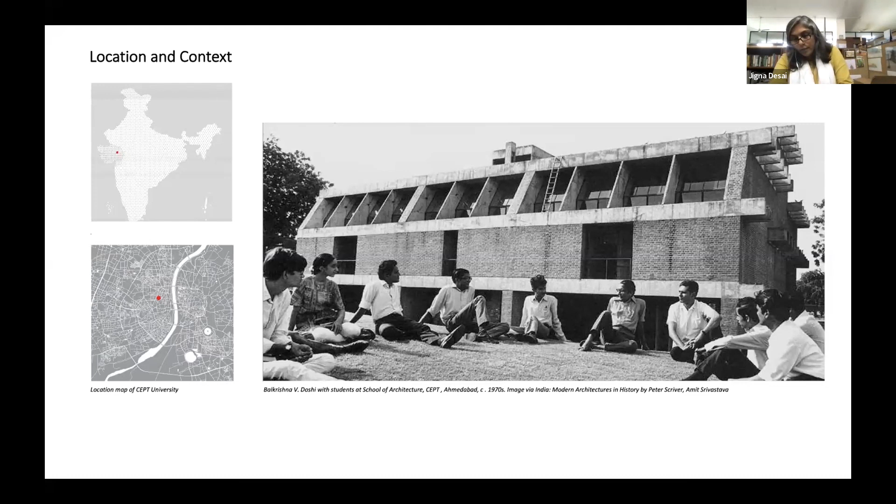In 2016, as I said, when we started discussion on it, we established the need for conservation in the context of the constantly growing campus that had become a university in 2005. You'll see the graphs and studies we did looking at the number of students that kept increasing while the size of our campus did not necessarily increase, even as buildings kept being added—that's a separate discussion, so I won't get into it. But you can see that when the School of Architecture started, the total number of students on campus was close to 100. By the time we did this research in 2017-18, we had more than 2,000 students on campus and more than 300 faculty members. Our books increased, our research changed, the gender ratio changed, and that changes the way we look at values on the campus as well. So these were the contexts we were dealing with.

The process included many people. As I said, we had various discussions with stakeholders, but there were also people at the university who invested their time in understanding the history. Gauri Bharat looked at the different stages of how the campus developed around the School of Architecture, and the core values around which it was being developed. Professor Rutul Joshi looked at the relationship between the city and the university that evolved over the years—when it started, the School of Architecture was practically outside the city of Ahmedabad; now it is within the urban network.

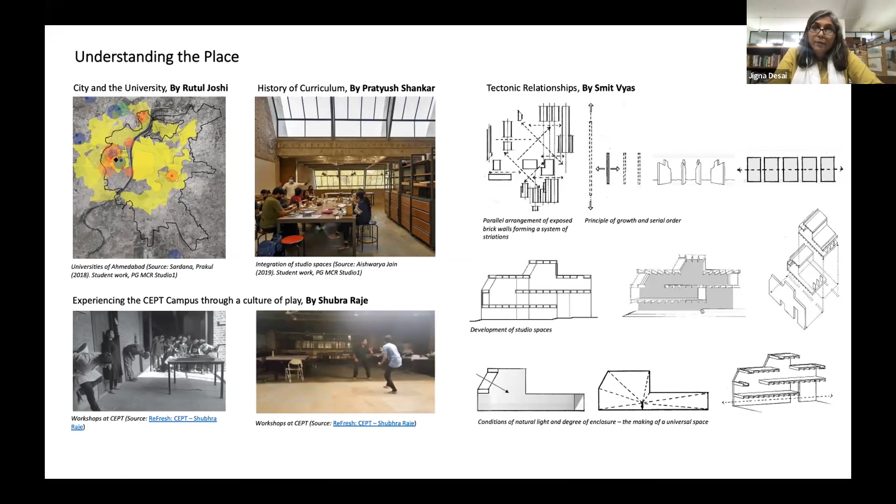Smit Vyas looked at various tectonic relationships that were important, and all of this was at the core of what we did. We looked into recognized discourses that already exist and compared the building to various international practices, and what makes this an important building.

What are the important vistas that are recognized? What are the important elements that are recognized?

The School of Architecture, in more than one way, is a significant structure in the history of architecture. Apart from being noteworthy in the narrative that builds up a Pritzker laureate's work, it also signifies an important phase of modernism as an interpretation of the principles in a context that is environmentally, socially, economically, culturally, and politically very different from the context of its origin. For India, the institution and its architecture represented a new direction of modernity that respects and values its colonial and traditional past, but is unafraid of reinterpreting and rethinking some fundamentals through the lens of democracy.

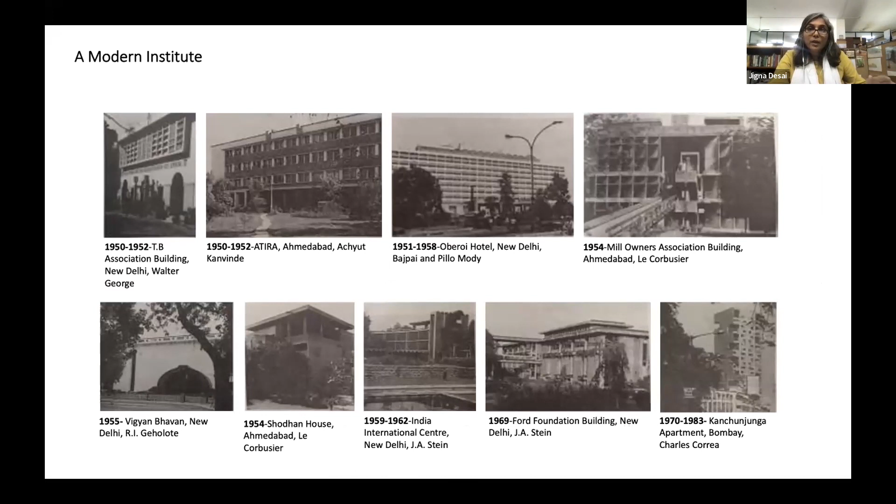We also looked at the building in context of other buildings that were built before, after, and around that period. But we also looked at the lived-in associations and the educational value of the building itself.

Education without doors is the root value of CEPT campus, as conceptualized through the siting and design of the School of Architecture building. Right from the process of construction, the building was and has been a place for learning for architects and students.

CEPT campus and this building has been a constant subject of study with various objectives of education, from study of anthropometrics and learning of drawing skills through sketching and documentation in first year, to architectural and design proposals made in postgraduate studios to interpret the nature of modernity and inhabitation of place.

Apart from the campus being a valuable educational environment, it has significantly contributed to the study of architecture, not only for students of CEPT, but for many schools in the country. Other than the significance of this building, this educational value was the primary platform on which the process of conservation was taken up.

I move to the second part, which is structural repair strategies that Arun has insisted we focus on, and I do this with inputs from Mehul Shah, who's the engineer, Khushi Shah, who's the architect who was in charge of our laboratory at the time, and Nigar Sheikh, who's the conservation engineer, currently also working with us on this.

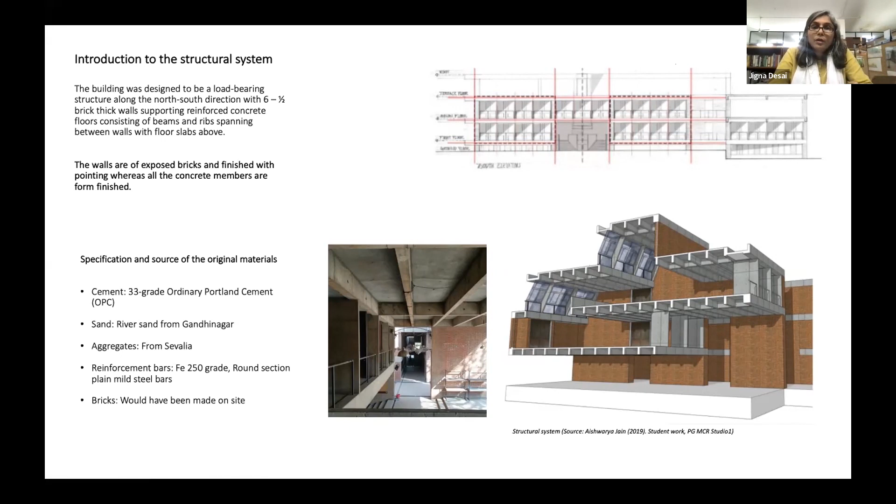And we found that at many places the extended spalling was due to the way repairs through the years, from the 90s to the time we took this up, were done over the period of years.

The condition of the structure when we found it, a lot of this was—as you can see, this drawing is students' drawing. It was initiated as students' exercises and then extended by the teachers and professors as cross-checking and testing processes through rigorous exercises.

We found cracks in reinforced concrete slabs, few beams, fins, and walls. We noticed that in some cases there was complete delamination and spalling of concrete. Doors and windows had not been functioning as intended because of bending in the slabs and beams. There was moisture seepage from the terrace slab, and services like water supply and drainage were a threat to the structure.

You can see the condition of this, and you can see some of the condition of the slabs and the gargoyles over here, where it was in terrible condition. Concrete was in a much worse condition than the brick walls, but because the brick walls were very thick and very strong, only the surfaces were damaged—except for the north and south side, which were not thick load-bearing walls, but were cavity walls.

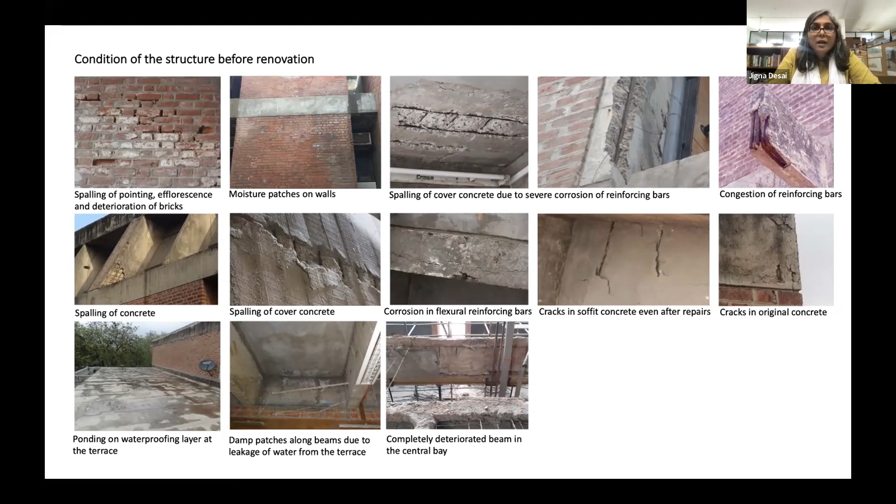Those were situations where the cavity walls had bulged in some places, and we had to relook at it. But the load-bearing walls, other than surface issues, and in a couple of situations where they had cracked, were in okay condition. It was the concrete that we had to worry about.

We conducted many tests, a series of tests that lasted almost 6 months. We took out 9 cores from various places. We found that there was porosity in the concrete that was there, and because of that porosity, there was high water absorption.

We did steel tests - I'll be fumbling with the technological terminologies here because I'm not primarily an engineer, but Nigar, who's here, will be able to explain if there are any questions. We had deflections on floor beams, so there was carbonation in the concrete, and we did brick tests for crushing strength, which were not in such bad condition.

We also then did tests to arrive at compatible repair materials.

For concrete, we did various mix designs. There were trial mixes that we took up. So we took up concrete mix design where trial mixes were tested for their compressive strength after 7 days and 28 days of curing. The color of the cubes was compared with the original.

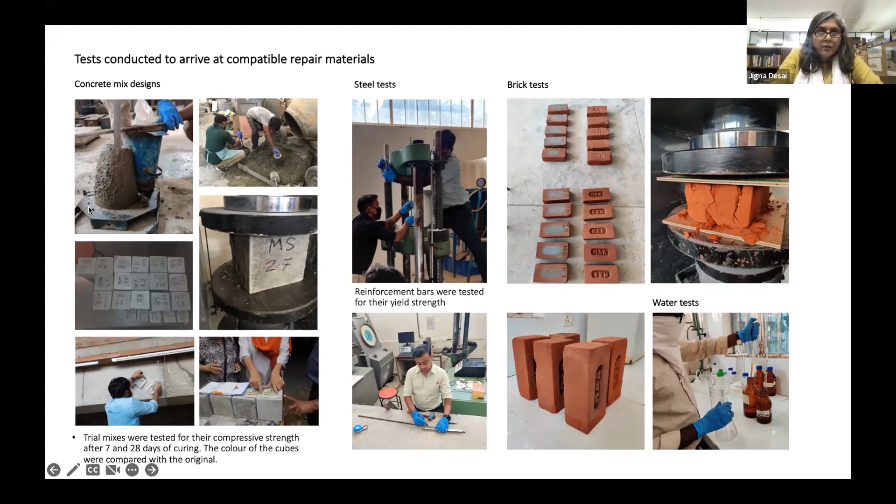And then we started sample slabs and sample repairs for further tests. So we picked up one of the interior slabs that was in very bad condition - just to give you context, the slabs here were 75 mm thick.

There was no concrete cover for the reinforcement in the slab, which meant that at many places the reinforcement was touching the bottom of the slab. Wherever it had started corroding due to that, there was serious falling, to the extent that slabs had fallen off while the spaces below were operational. Fortunately nobody was hurt, but that had led to some of these decisions.

So we did UPV tests, rebound hammer tests, concrete core tests, and carbonation tests, also on the new sample slabs that we made.

Repairs were done based on two conditions we'd identified. One set of conditions was where the slabs were in such terrible condition - mainly slabs and fins - that we had to recast them. But in certain cases, only patches were problematic while the rest of the concrete was fine, so in such cases we did repairs with polymer modified mortar.

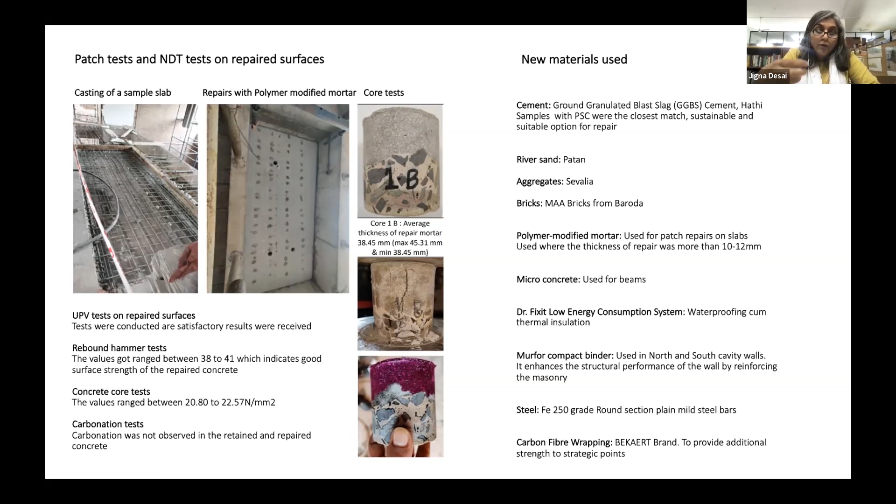As I said, for steel we went ahead with plain mild steel bars because of the behavior difference. In certain cases, at strategic points, we also used carbon fiber wrapping to avoid further complex stresses, especially in the context of earthquakes and future earthquakes we may come across.

So to give a broad idea of structural repairs for brick walls: there were a couple of places where we found deep cracks, and the rest were surface situations. Wherever there were surface situations, after providing support, we removed the outer layer of the brick.

As I said, this is a 6.5 inch thick brick wall, so we could easily remove the outer layer and replace it.

But in certain cases, the cracks were very deep, and in those cases we had removed at least 2 layers till the place where we could see the crack going. We stitched the two parts with SS bars inserted in either side, and then relayered it with new bricks.

The north and south walls, as I said, were cavity walls with reinforcement in the middle, and because of that reinforcement, the walls had bulged. So we had to remove those walls and reconstruct them. While reconstructing, instead of using RCC, which would again, due to seepage or water ingress, result in the walls bulging.

We used polymer — we restored them through polymer modified mortar, as well as fiber reinforcement rather than RCC reinforcement.

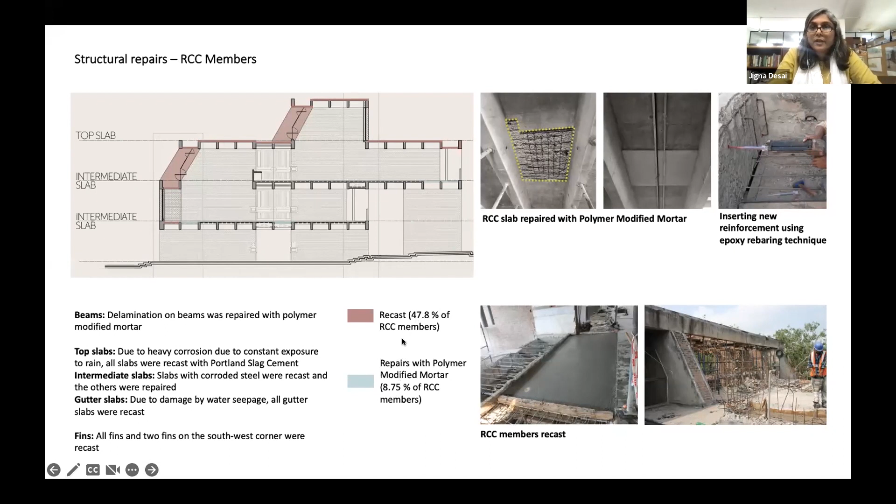Quickly, the RCC repairs — I think this was the most interesting part, where we had to recast 47.8% of RCC members, and repairs with polymer mortar were done on 8.75% of RCC members. I've talked about the process in detail, but this is the layout of members.

There were certain challenges, like bonding between old and new. The thickness of the slab was 75 mm, but when constructing new slabs, the edges of the beams would crack, so in order to address that and have longevity in the top slab, we made the slabs 100 mm instead of 75 mm.

There was the question of pivoted doors at deflected slabs, and how to adjust the 100 mm was an issue. This was a very interesting and long discussion we had while repairing with polymer mortar.

On the south side, we were able to flush it with the older layer, but on the north side, because of the closeness of RCC to the edge, the polymer modified mortar, when repairing the concrete, comes out a little bit. There's a very interesting ideological discussion around the purisms and contingencies of modern architecture that can be had on this.

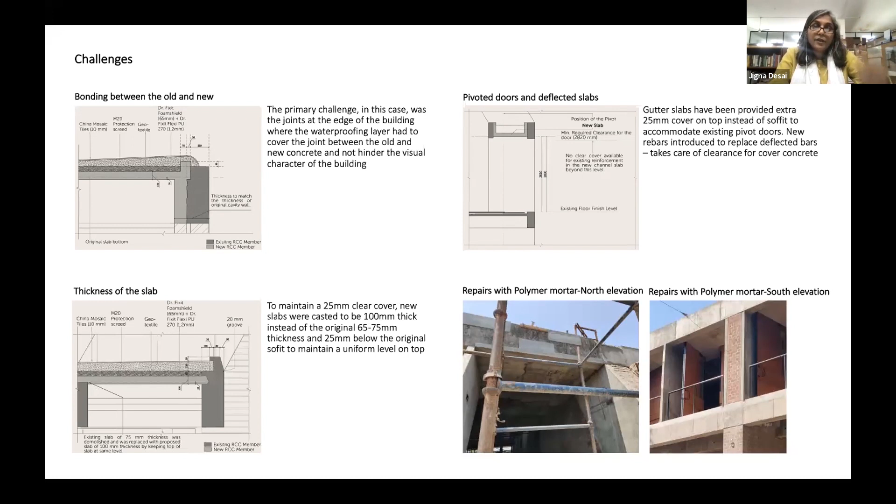Very quickly, on thermal comfort and services — inputs from Rajan Rawal and Mihir Patel, both experts. While recasting the slab, we introduced exhaust ventilators and DGU fixed glass panels.

In order to address the question of comfort and new pedagogies, we introduced certain air-conditioned spaces. We did all of this so that important flows of spaces for this particular section and building were respected, while still achieving comfort.

In the last summer, we noted a difference of 4 to 5 degrees between the parts of the building that are not retrofitted and the parts that are retrofitted — the retrofitted parts are cooler by 4 to 5 degrees.

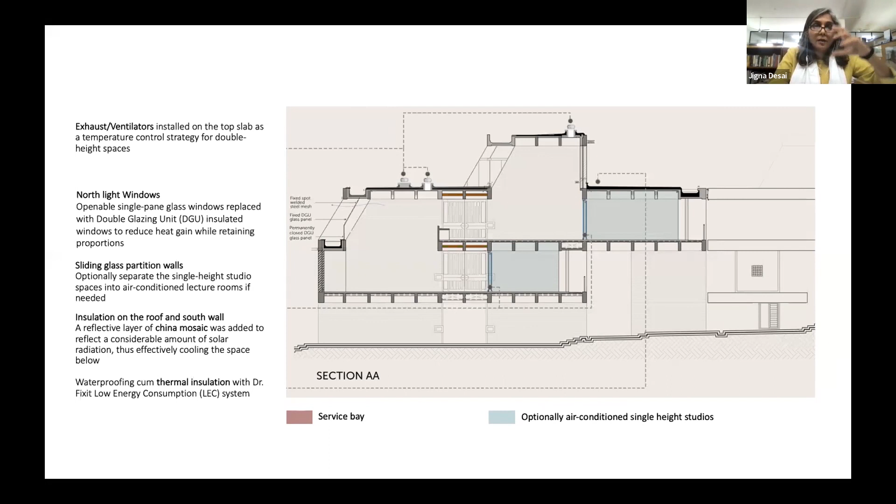We also now have a monitoring and maintenance plan. I won't go into detail, but we have biannual and yearly maintenance during summer breaks that includes checking of concrete elements and brick walls.

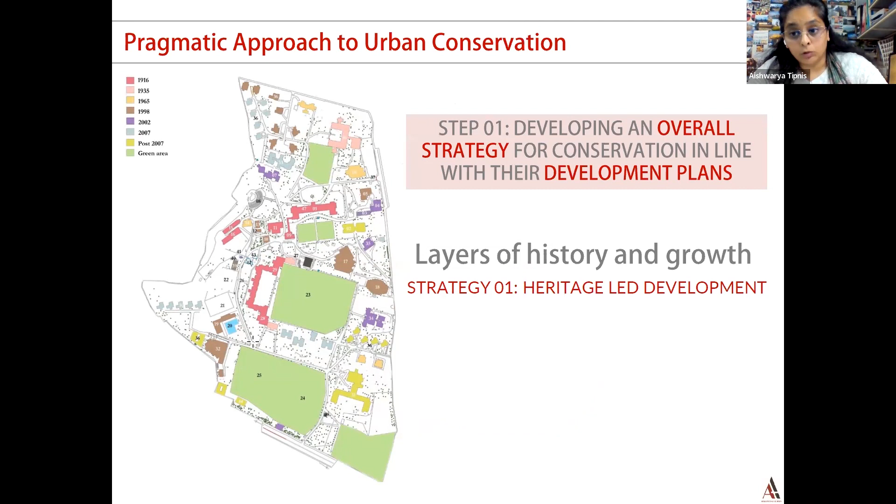So the first question we had to answer was how do we define this heritage, and how do we define the values of this particular heritage?

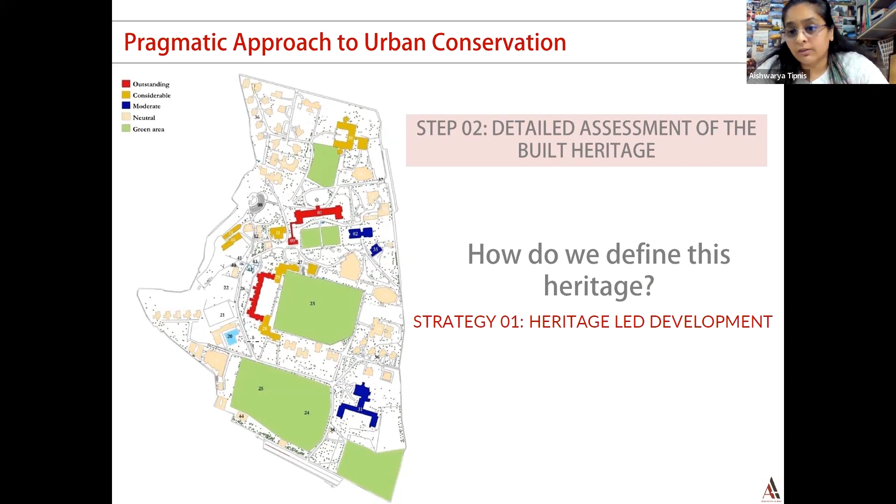In 2014, when we started this project, we decided to take a bottom-up approach where we engaged with the community through various workshops, not just with the students, but the staff and also the alumni.

This was to come up with an understanding of what really mattered and what this heritage was that we had to preserve while taking the building into the 21st century. The key observation from this series of consultations was that this had to be an institution of excellence.

It had to be a center for learning, and the needs of teaching and learning therefore became central to deciding what we were going to do with this building.

What also came out was that the main building was a key part of the collective identity of every generation of DOSCOs that went through this school. It was often the backdrop for all the group photographs, and so the heritage value actually lay in the collective memory of the community.

I'd also like to add that this building is an unlisted heritage building, and the idea to conserve it was largely for the love of the community towards its heritage.

We got involved in the project in 2014 because the community felt there were some structural issues that came to light. There were issues with cracks they were seeing everywhere, and they were really worried.

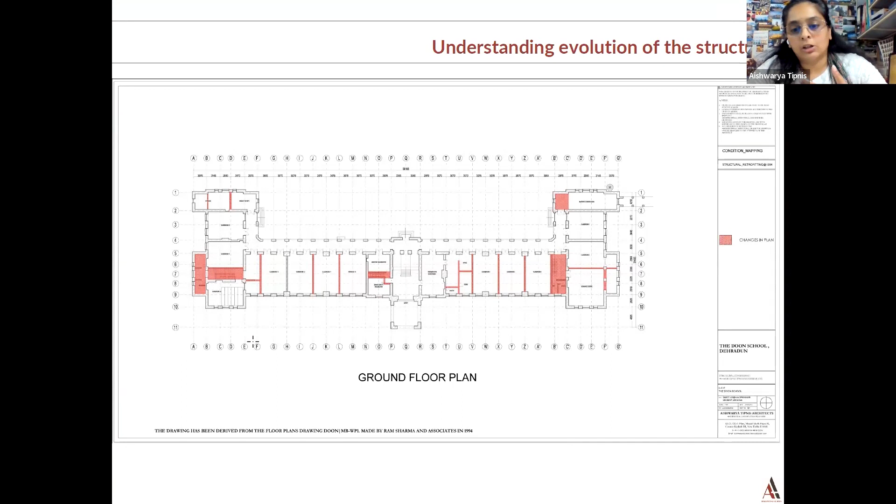There were places where they added partitions and new staircases, all done with the idea of seismically retrofitting the building for future earthquakes.

When we started doing the analysis, we realized that the actual cause of some of the structural issues we were facing were these interventions that had happened in 1993.

We did a first visual analysis of what we thought were the issues, and as you can see on the screen, there were several stepped cracks almost everywhere. Wherever these RCC lintels had been inserted, there were certainly cracks on those sections of the wall.

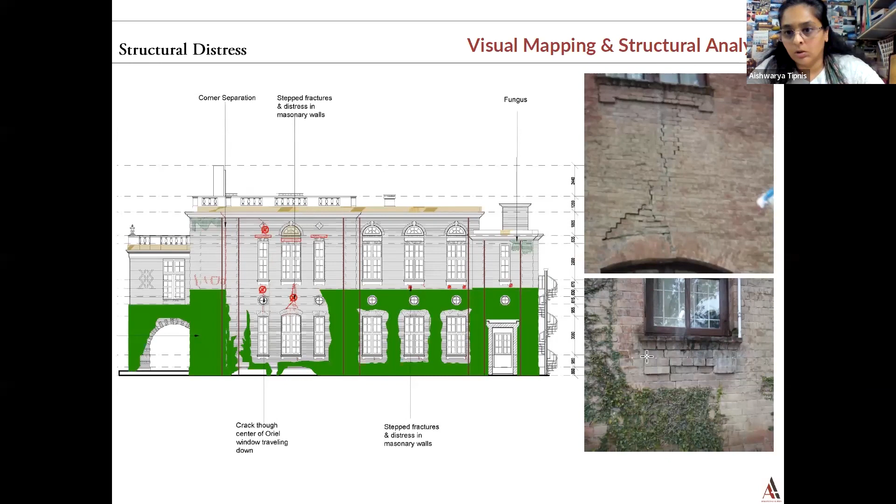The other critical issue was that the main facade of the building on the ground floor had this ivy, which was again a critical element of their collective identity.

The school has always had an ivy, and that was one of the main concerns that came out through the consultation with the community, that they needed the ivy.

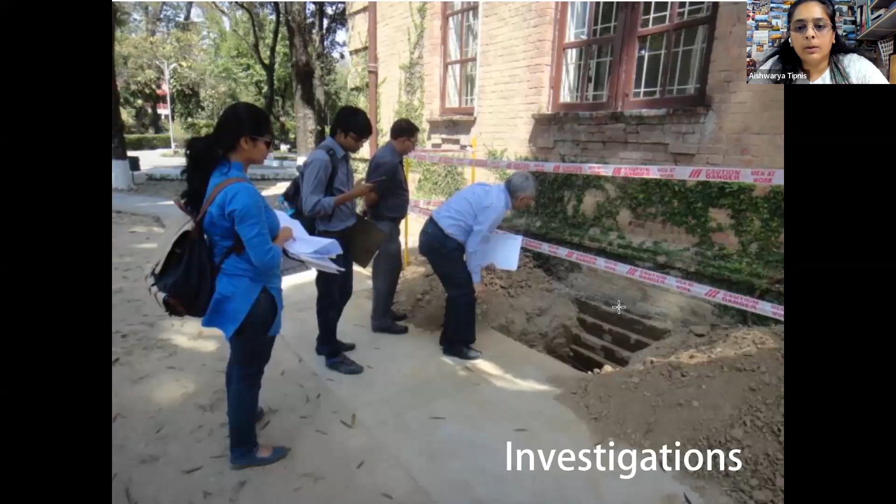However, the ivy was trapping a lot of moisture, and all the rooms on the ground floor had severe signs of seepage, and all the bricks were showing signs of efflorescence. So while the ivy was very important to them, it was causing quite a lot of harm to the material fabric of the building. It was a very challenging thing to sort out, because this was non-negotiable, but we had to find a technical solution to sort the material issues while keeping their collective identity intact.

So we started first with some very basic investigations as advised by our structural consultant. When we saw all those cracks, the first thing we did was investigate all the foundations, and it was a relief to find that the foundations had no issues as such. We looked at the terrace and realized there had been layers of materials put for waterproofing. We did find the original brick bat coba, but we also found layers of waterproofing put on top of that.

When we looked inside, we realized there was this stepped auditorium which seemed pretty old, and everyone from the community told us it was always there. But this was the section of the building where we found maximum vulnerability, on the exterior as well as the interior, and part of the foundations here had cracks going all the way down.

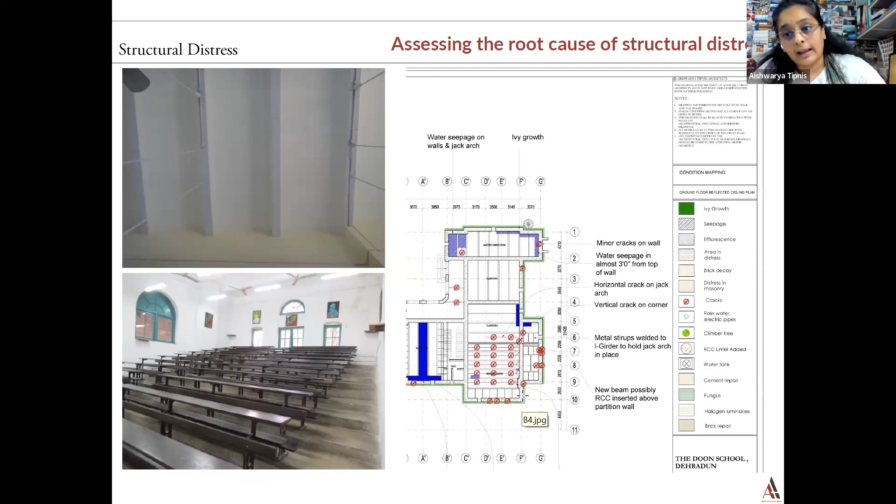The other significant problem was that over the years, all the levels around the building had gone up, and the building had sort of become like a saucer. Dehradun receives very heavy rainfall, and as a result, water was always collected at the base. While they had created some drains, some of these actually led nowhere and led to more water at the edge of the building, causing the severe seepage issues we saw.

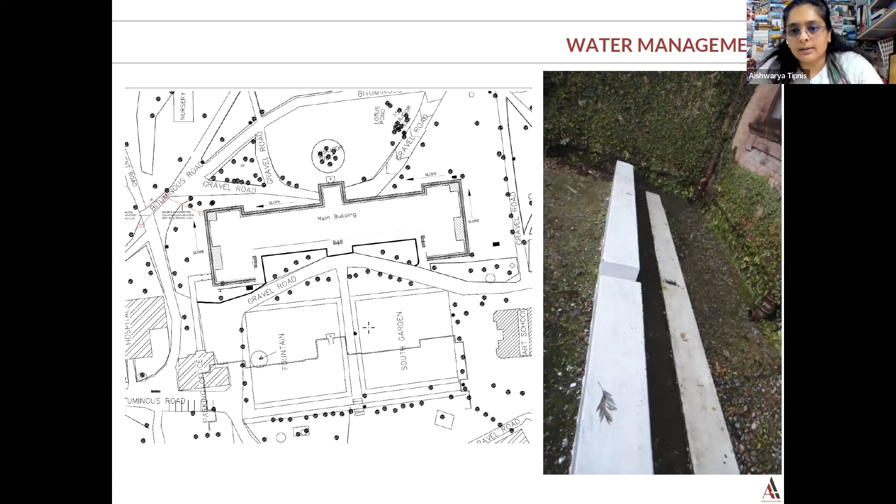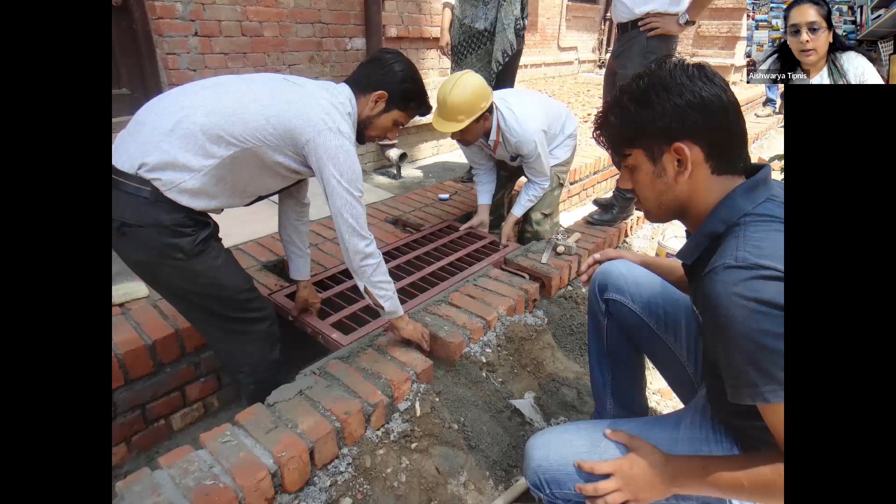So some of the things we did was sample methods of treatment, to get rid of the moss and understand what to do with these drains. We worked out an entire system of water management, putting in damp protection as well as a complete drainage system to take surface rainwater away from the building, in the hope that it would help with water seepage and ingress from the floor. The entire work was done by the estates department of the school along with local masons and contractors, and it was completely executed locally.

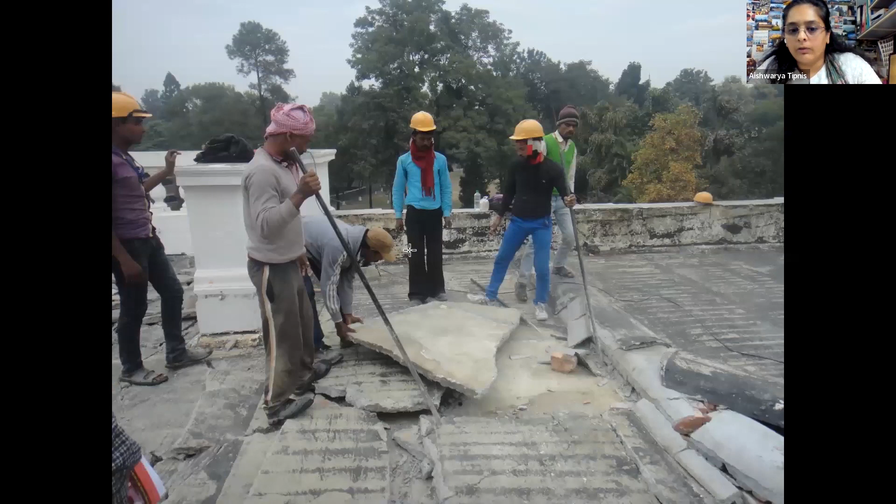The second issue, as I mentioned, was the terrace. The terrace had these layers of waterproofing, and when we started the work, we were able to get back to the original level of the slab, then put in a new layer of waterproofing like a membrane, finish it off with brick tiles, and make sure all our water outlets were clear so rainwater could disperse properly.

Now, it seems like a very obvious thing to do, but having done this, I think the major problems they were facing with water seepage from the roof as well as around the building were completely sorted, and we have not heard any complaints even 7 years after the job was completed.

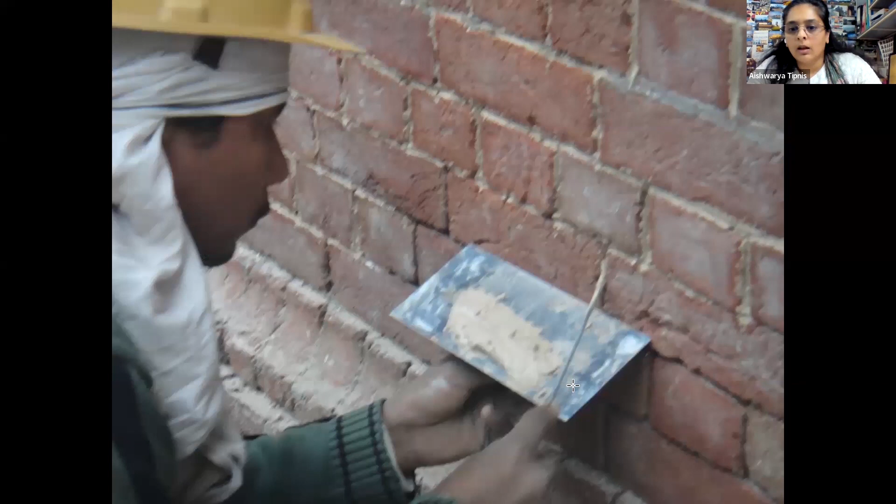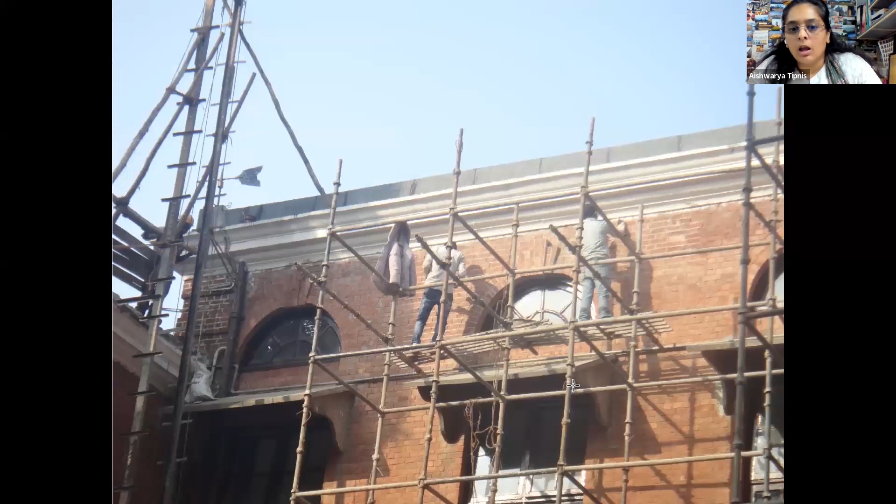The other thing was, once we removed the ivy, we realized that most of the pointing had been completely destroyed. So the local masons completely re-pointed the entire building in lime mortar. This was new for them, because as an estate and as a team of local contractors, they were not very conversant in using traditional materials.

However, they had never done something that needed to be reversed, like putting in cement. So we were lucky that it wasn't something that had damaged the building beyond reversal. Once the pointing was done, in sections where RCC lintels had been introduced, we couldn't remove them, so we decided to let those beams be but add additional reinforcement. Helifix stainless steel bars were chosen as a system, introduced into the cavity in the pointing, and since they were stainless steel and compatible with the lime mortar, that was one of the main reasons we chose them.

So they were used on some sections of the facade where we had cracking of the arches, and in some sections where we literally just bypassed the RCC lintels and fixed it. This was on the advice of the structural engineer on the project.

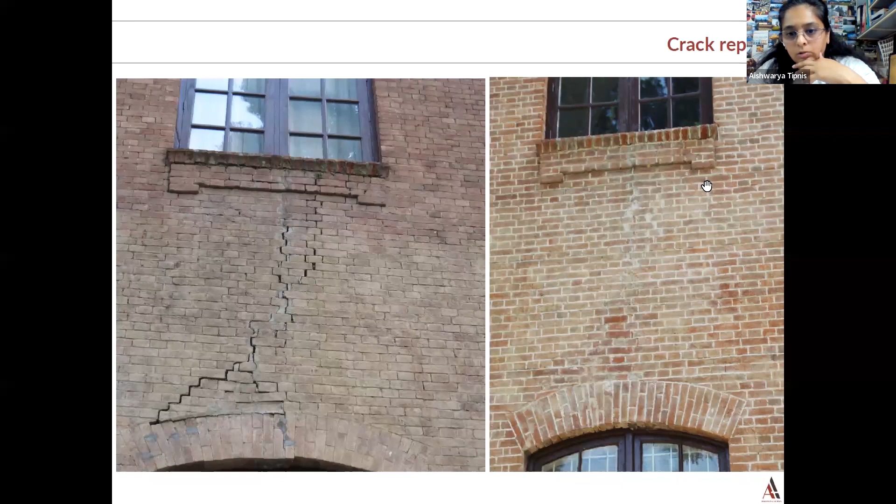These are some pictures showing what had happened, where the arch had slipped. This was all taken down and rebuilt, and we've had the Helifix bars inserted at two or three sections in this particular elevation. I'd like to draw your attention to this particular facade, as you can see this had been bricked up and these windows had been made small. This is really what we found out was the actual reason for most of this distress.

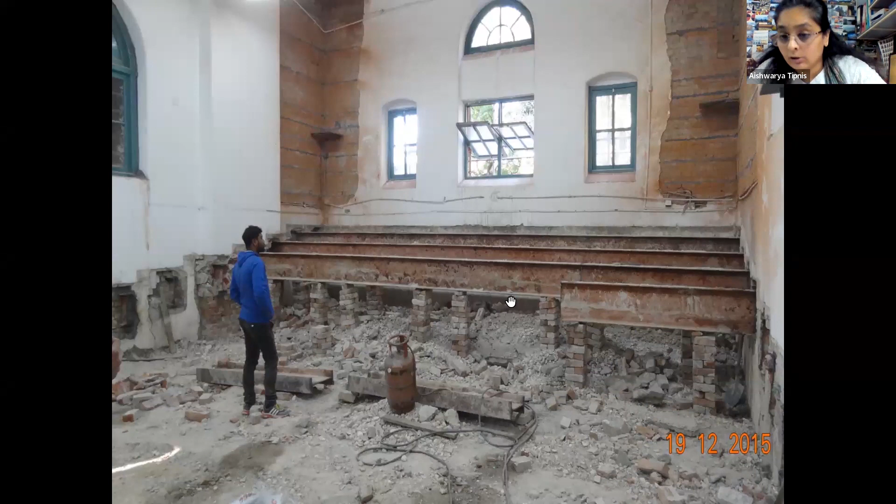This stepped auditorium was added in the 1950s. When this extra loading from this building was carefully taken down and the entire space reimagined as a new collaborative working space, we were able to address the main reason why this extra stress was coming in, with all of these I-beams that were added in the 1950s.

As far as the other spaces in the building were concerned, we looked at adding new services that helped 21st century teaching, which required overhauling the electrical and lighting as well as acoustics. We were very careful that while we wanted to add color and a new element, the aesthetic of and the feeling of being at Doon had to be retained. So it was a very critical balance for us to convince the community that bringing in a new thing was actually not a bad idea.

Seven years down the line, I think it has now become part of the collective identity of the current generation of students in the building. This is just a photograph to show that now these buildings are used and loved, and it's very much a part of their identity. We received a UNESCO award in 2016, and this is how the building looks today.

I think the whole point of this project was really to say that if there is love for a building and there is the right advice, a lot of things can happen. There was no mandate from law. There was nothing protecting this building other than the love of the community for its own heritage. So I'll stop there. Thank you.

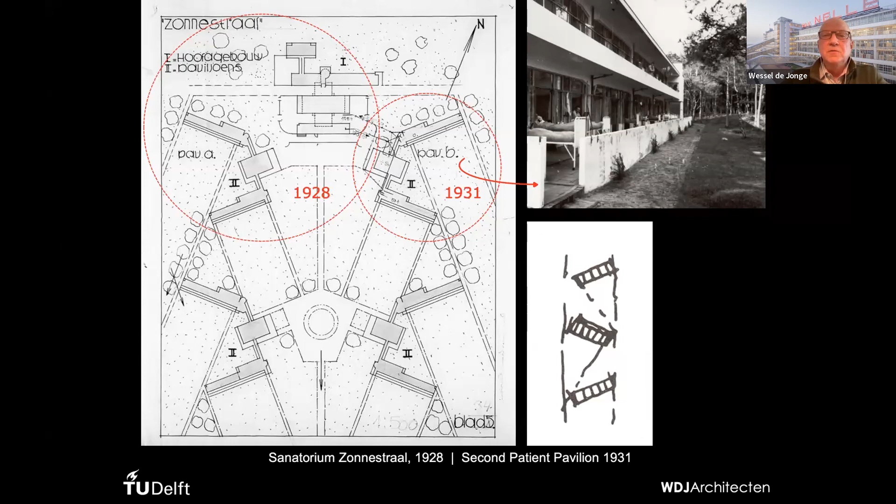Here you see the layout as it was built. The third and fourth pavilions were never constructed. As you see, the second pavilion in the back is already there, so this picture was after 1931.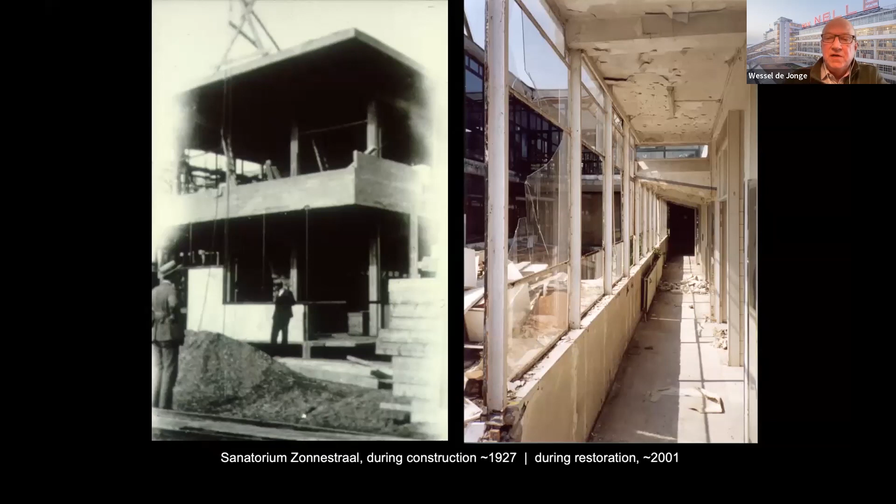This is exactly how the sanatorium buildings of 1928 were built after the load-bearing concrete frame was in place. You may see on the left picture, it's not a very good picture, but it's the only one we have, found in an archive. You may see the gentleman positioned in front of the spandrel, and to the left and right of him, vertical I-beams, INP 8. On the right picture, during restoration, you may also recognize those I-beams, and the spandrel beneath is made of this double-sided plastered metal mesh, a very light construction.

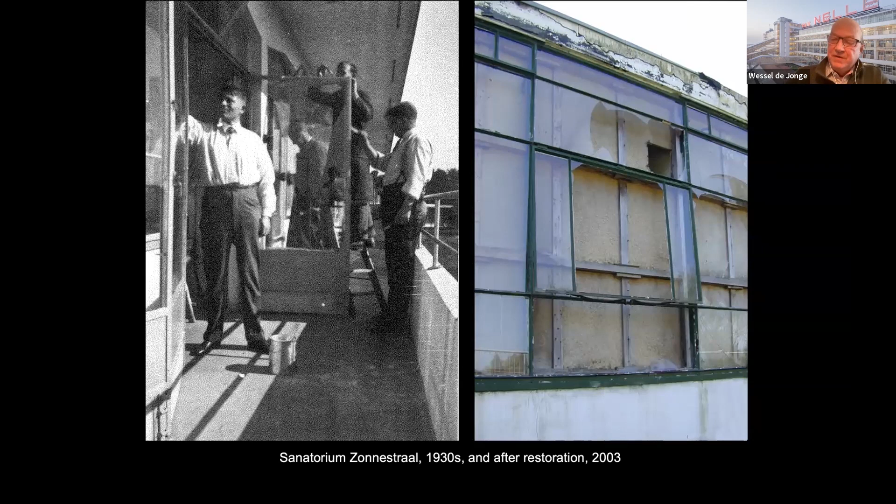As I said, the materials were not necessarily very durable, and that was also the case with the metal framed windows. Galvanized windows were already available in those years, but they were not used because the architect expected the building to be used only for 30 years, so that was not a good investment in their view. As a matter of fact, the patients who were curing, most of the people were not sick, it was an aftercare colony. So most of the people were already largely cured from tuberculosis, but they needed aftercare, and all kinds of activities took place on the premises, one of them being painting the steelwork. So there was not really a need to make the steel framed windows very durable, given that the patients would care for their maintenance regularly.

A particularity about the facade was that the architects opted to save more money by making the first window of 1.5 meters a complete casement, and then the next casements would lack a jamb, welded against the first one, with the effect that they shared a jamb in the middle, as I indicated on the lower picture. That little T profile is actually part of the window to the left as well as part of the window to the right. So there was no measure tolerance in the facade at all, which produced all kinds of problems later during construction, because the building is 33 meters long in total, with over 20 of such windows. You can easily imagine that if there's 0.5 millimeter of incorrectness in the measures, you end up with a few centimeters short in the end.

So they experienced, it was a kind of experimental curtain wall system with all kinds of mistakes that were still apparent and became problematic in the restoration later on.

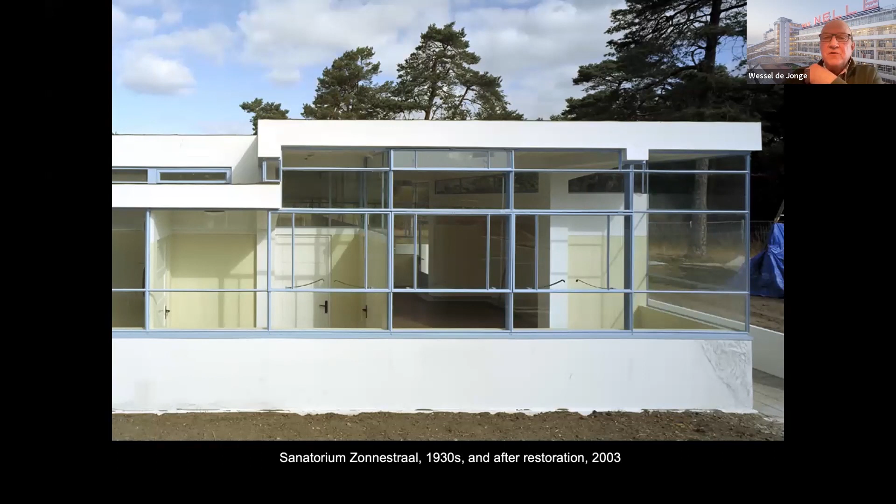The material defects, damage and loss was the concrete frame. There was a lack of resistance to shear forces, reinforcement corrosion and cracks. Of the steel framed windows, 90% had been lost, so the one you just saw was the 10% remaining. The roofing was worn out, the building service systems had almost gone lost, and the interior finishes had gone lost as well.

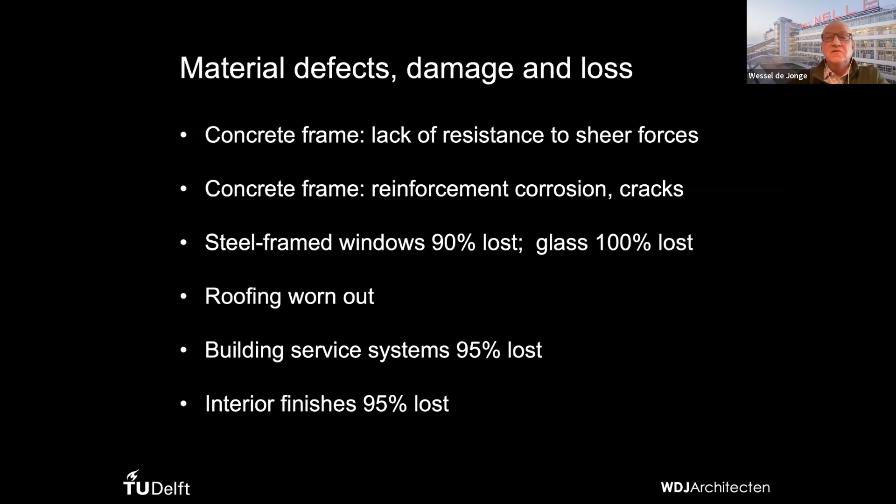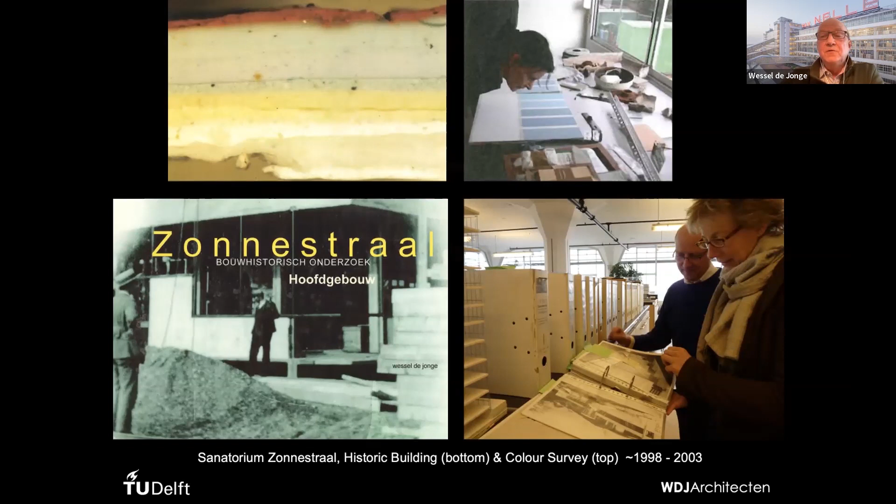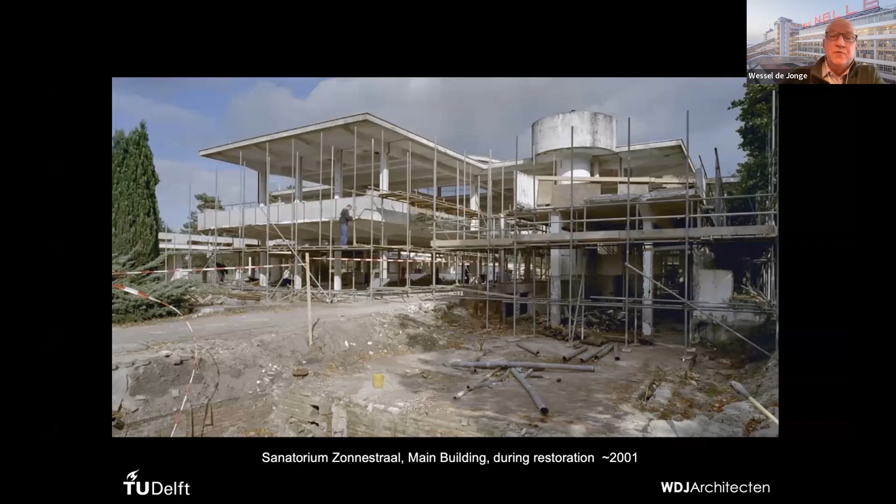All the partitions that were in the building were not original, and had been taken out. The 1970s facades had been taken out, and so on and so forth. Only that one remaining part of the building was restored.

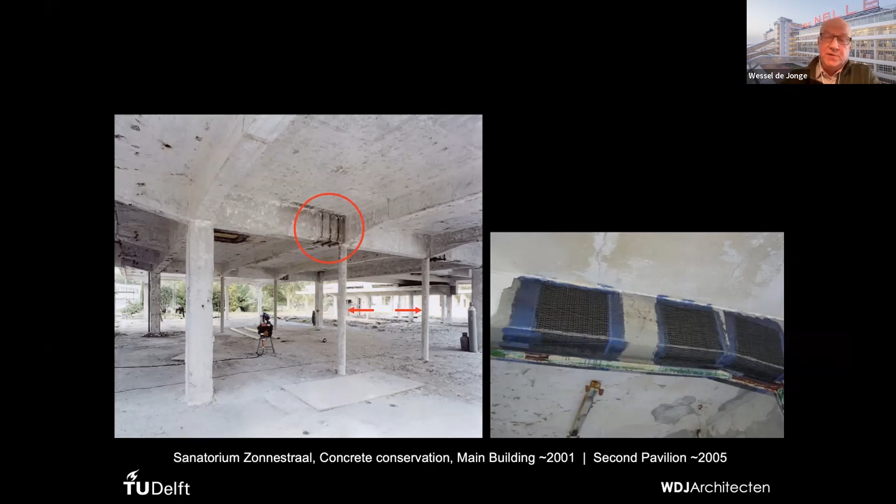Here you see a carbon wrap reinforcement, as already indicated by one of the speakers before, Bekar. This made me think also of the brickwork of the IMA building. We were talking about stainless steel, which is very expensive to reinforce the brickwork. I was also thinking about using ordinary steel welded into an electric circuit so that cathodic protection may work. Carbon reinforcement is also possible. In the Netherlands, we also use plastics as reinforcement, as well as gluing the bricks together. That may also be tested for the IMA.

Now the main issue, I see I have to really speed up. The main question has been about the glazing.

In the reconstructed facades, instead of the original 25mm profiles, we decided to choose 32mm, in which we could place double glass of just 11mm thick, made specifically for the project, with a drawn glass outer panel to mimic the original character of the drawn glass. This allowed us to make insulation.

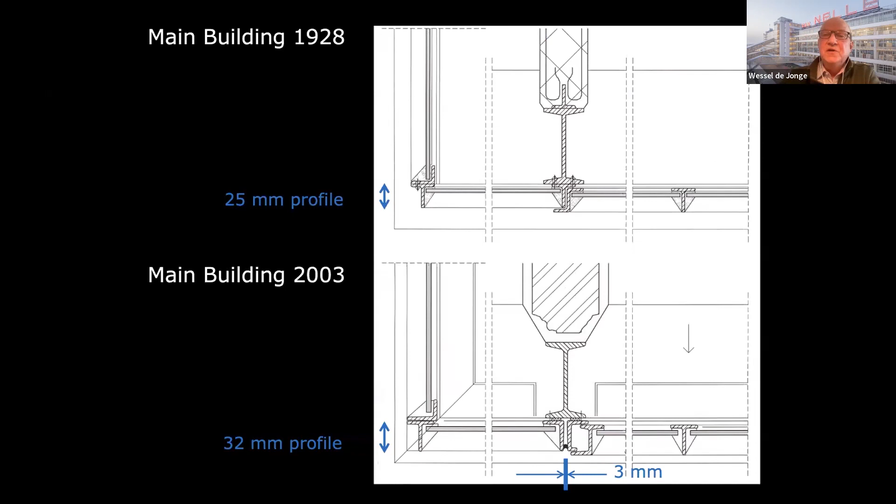The other change we made, as you see on the bottom image, was the shared T profile of two windows, which we replaced with a double L, allowing 3mm of measure tolerance, which made the reconstruction possible. To the right, you see that detail filled by putty, so you can easily distinguish the reconstructed details from the original details to the left.

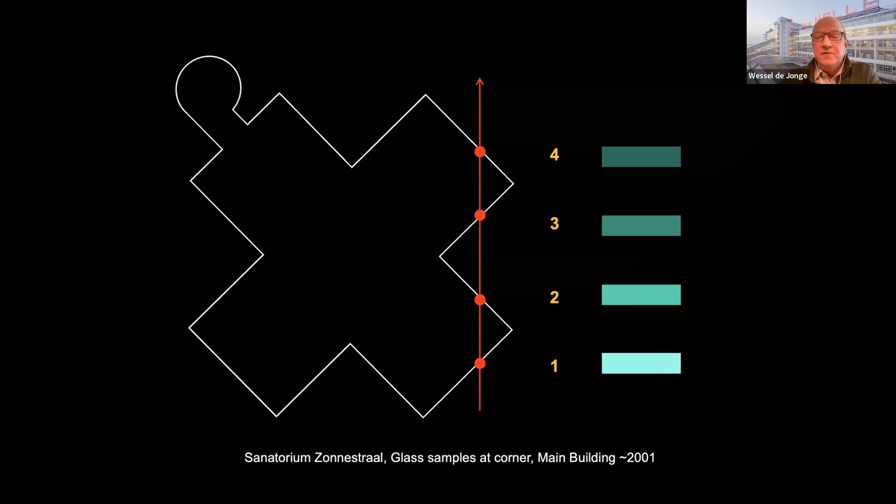Here you see the building during sample testing. The corner of glass was tested extensively. As I said, it was drawn glass, but present-day glass is slightly green, and the upper floor, due to its cross shape, would allow you to look through 4 layers of glass. So the greenish tone was really an issue, as well as the rippled surface of the glazing that we had mimicked.

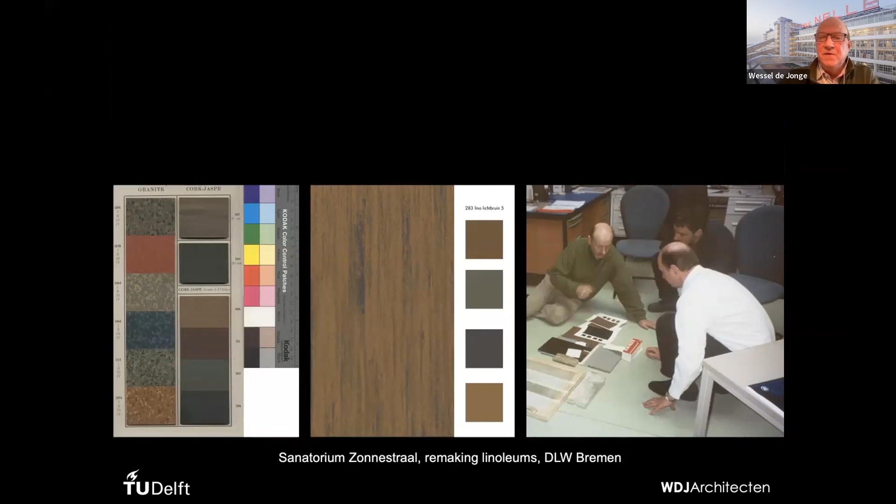The linoleum that was originally there was no longer being produced. You see the original samples from 1928 to the left. We digitized the samples and tried to analyze the types of pigments that were used, as you see in the middle. To the right, you see us in the laboratories of DLW Bremen, one of the big linoleum manufacturers in Europe, where we were able to remake the linoleum.

With the last few slides: what you have seen is that the restoration involved a high degree of reconstruction, but because it was based on extensive research that took several years, we were sure that it had a high degree of truthfulness. All the reconstructions we did were based on factual findings of the research, so we didn't take chances of making mistakes or interpretations. We kept original materials and constructions wherever possible, but as you've seen with the window details, we accepted a degree of interpretation elsewhere.

Also, the complex—maybe useful for the IMA case too—had some repetition. We had 3 buildings, so we decided on various strategies for each. That allowed us to be a little more pragmatic in some instances, because we knew in another building, or another area of the same building, you could see the original details and how it originally was.

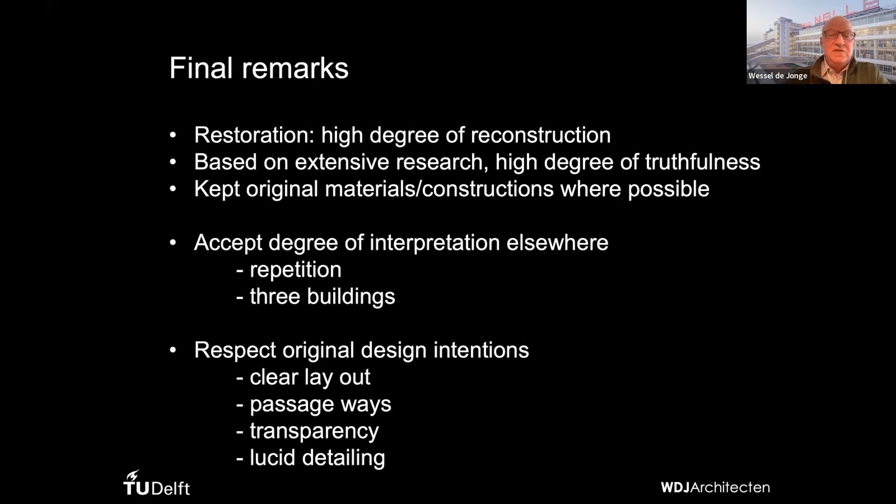Thank you very much, a very interesting case study. Shall we now move on? Arun, I can try and share Ciro's presentation. Just give me a second. Yes, please, thank you.

Eladio Dieste studied Calculo and Mechanical Engineering in Montevideo. After graduation in 1947, he formed a company dedicated to micropiling and began to provide structural advice to local architects.

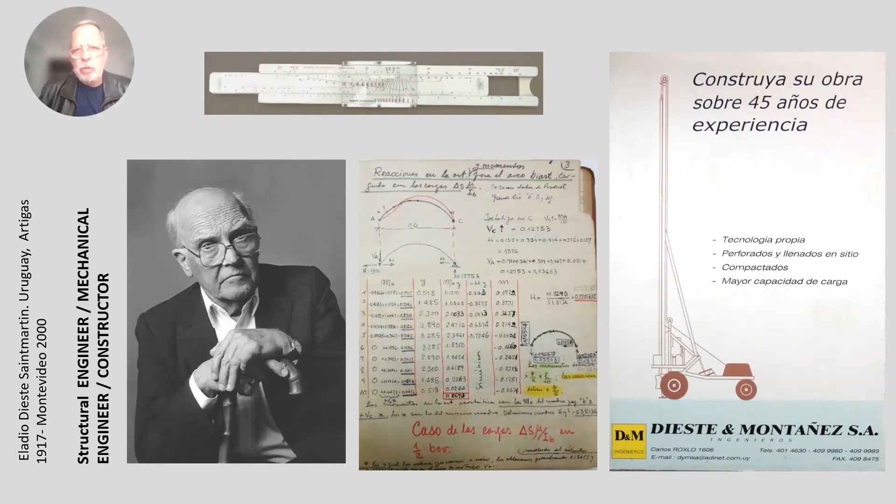In 1955, he formed with Eugenio Montañez a construction enterprise with workers, professional machinery and equipment, oriented to the construction of industrial buildings. He specialized in construction of multiple curvature vaults in reinforced brick with mobile formworks and sectional handling of natural light, which, due to their economy, earned him recognition and numerous public and private bids throughout the country.

We present the four basic structural typologies used in Dieste's works. The upper left image corresponds to a double curvature or gause vault. The surface is formed with a grid built with bricks and metal wires, supported on reinforced concrete beams and column structures. They are complemented by steel turnbuckles inside. In this system, free spans of 50 meters between supports were achieved.

On the right, we see a self-supporting vault, a catenary placed linearly with a V-shaped form in the joints, which house the steel reinforcements and tensors embedded in concrete. With this system, roofs with free spans of 24 meters and overhangs of 13 meters were achieved. These two typologies have an average roof thickness of 18 centimeters.

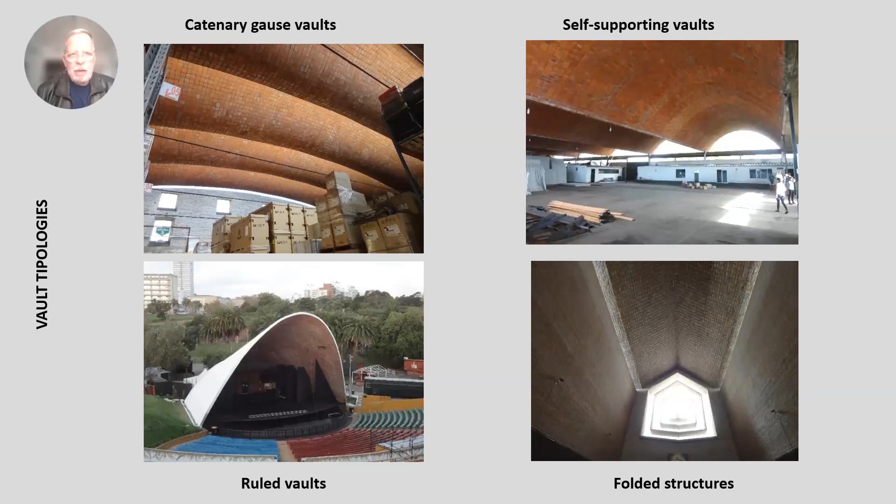In the lower part, we see examples of less used typologies, also in reinforced brick, mainly due to the high cost of the formwork and longer construction time, such as ruled surfaces and folded structures.

Knowledge of the materials and their characteristics is essential to understand the particularities of the design and to guide the conservation of the buildings. In this case, the same materials were always used: handmade bricks for houses, schools, and buildings that do not require large spans, with lime and cement mortars.

Industrial brick for vaults with steel wires in the joints. Flat clay tile for the final covering of the vaults. Industrial waterproofing materials for the roof. Reinforced concrete beams and columns, generally exposed and designed according to the specific structural loads. And finally, different types of plain or braided steel tensors, exposed or embedded.

Between 1955 and 1995, the firm Dieste Montañez carried out more than 150 works in Uruguay alone, and another 50 between Argentina and Brazil. It also advised on some works in Spain. Most of the buildings are surprising for their structure, but some of them have truly exceptional characteristics. A high percentage of these buildings are still in use.

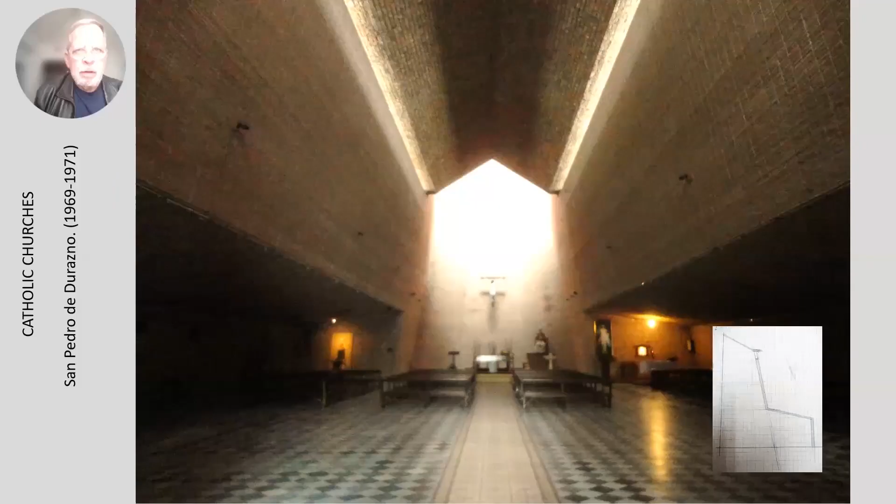This is the interior of the Church of San Pedro in Durazno, a work that replaced a burnt nave, 26 meters wide and 32 meters long, free of support, achieved with reinforced folding, in addition to a masterful handling of light.

As with other buildings, these present problems derived fundamentally from the lack of maintenance of the roof. Almost all the Dieste works are still in use. It is important to note that in Uruguay there are no earthquakes, so these daring structural features were possible.

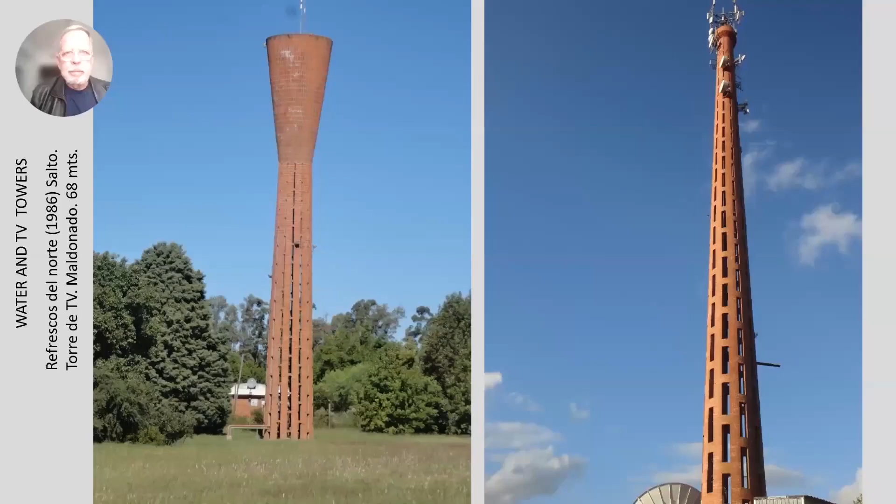Another very important typology in the project is the reinforced brick towers, designed primarily to support water tanks in factories or new urban areas, as well as radio and TV antennas. On the right, we see the Maldonado TV antenna, 68 meters high with a base only 3.5 meters in diameter.

The constructed example we are going to use is the Church of Cristo Obrero. Although it is the best known of Dieste's works for its spatial and constructive quality, it is a very small building, with just over 500 square meters of construction and 16 meters wide.

It is a parish church in a semi-rural working-class area, built between 1958 and 1960. It is important to mention that the design, calculation, and supervision of the work were carried out by Dieste himself, due to a spiritual commitment, since he had recently been baptized as Catholic.

The interior of the building is clearly developed as an integral structural system of reinforced ceramics. The walls serve as support and generate an integral structure with the double curved vaults of the ceiling. It is completely brick interior with well-placed light entrances, generating an intimate and at the same time sacred space.

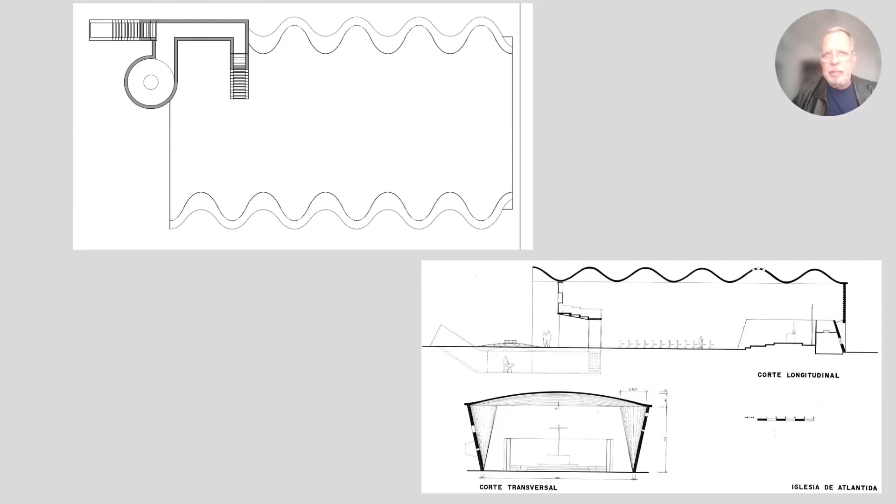The roof is composed of 5 Gaussian vaults, plus a half vault that protects the entrance. Finally, there is a free standing bell tower.

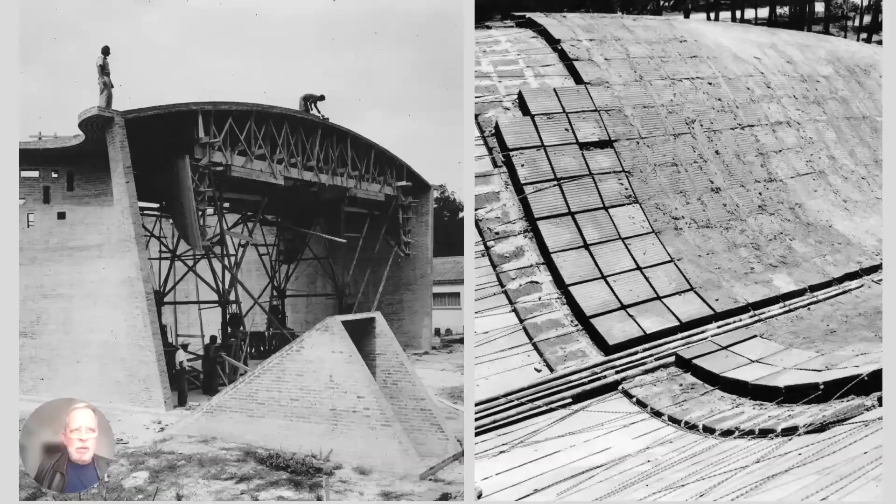Here we can see how the mobile formwork is installed to assemble the roof vault by vault, supported by hydraulic jacks that allow moving to the next position and folding wings. On the right, a detail of the construction of the cover near the formwork.

The mold is placed in the straight line with the tensor already installed on a row of brick slab that will leave the lower view above the industrial blocks, creating between them a wire net and the joints. Finally, a layer of mortar, then waterproofing, a layer of sand and brick slab with pour mortar to allow evaporation and mobility.

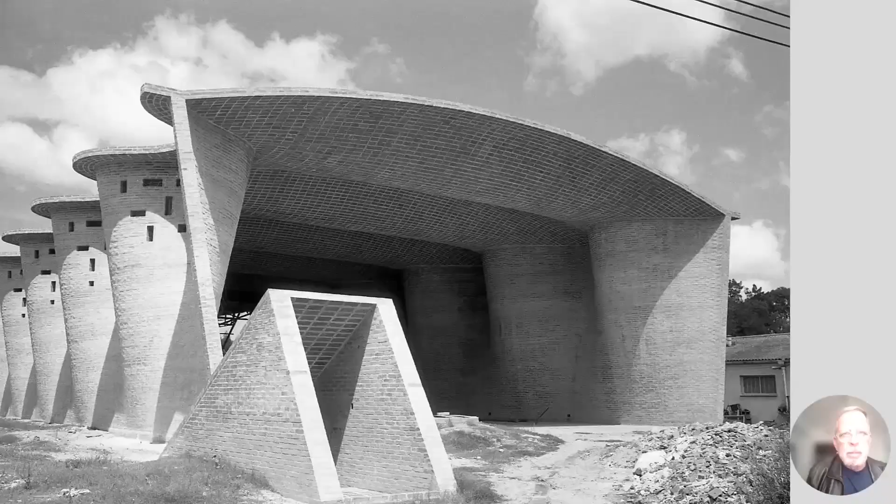Once the building is finished, the mortar is cleaned. The facades are not tied to the structure and allow freedom in their design. The triangular parallelepiped on the exterior is the access of the baptistery.

We see presence of lichens and other microorganisms in the most humid areas, especially in the valleys, precisely where the tensors are located, with this increased risk. This led to a loss of cohesion of the pieces, greater infiltration, cracks, and detachment.

We can see how the upper part of the vault was at that moment, where the upper slab had lost coherence and the waterproofing started to be affected. After a heavy rain, humidity stains are visible on the vaults, which persist later, as seen when the camera with infrared thermography is applied.

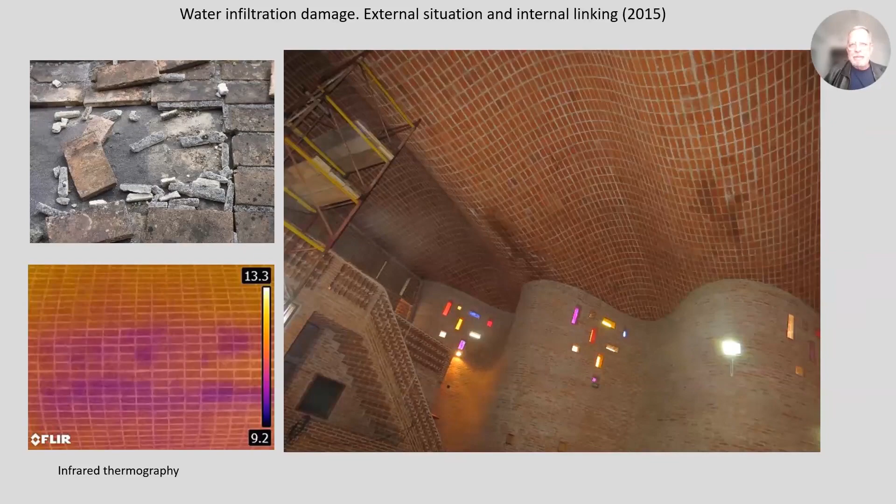Less damage is visible in the survey of the walls. There is no presence of capillarity in the side walls since the building was built on a stone field 1 meter high above the ground.

However, the loss of the rainwater flow in the roof generates drip stains on the conoids with the presence of microorganisms. Below we see efflorescence on the mortar line of the baptistery entrance cover.

We can see in detail the damage caused by the filtration of the planter located on the dome of the baptistery, whose lack of maintenance caused even structural cracks. Also, the damage on the high water table levels with affectation staining completely the bricks. At present, the dome was repaired and the baptistery is being kept dry by mechanical pumping, while different options for controlling the water table are being analyzed.

On the right, we can see an example of the exterior walls with oxidation, corrosion, and explosion of some metallic reinforcing wires. In this case, they don't represent a major risk because we find a net with structural continuity with other healthy wires around it. As this is a net, it is possible to replace the brick and reestablish the connection between the areas where the metallic wires are not oxidized.

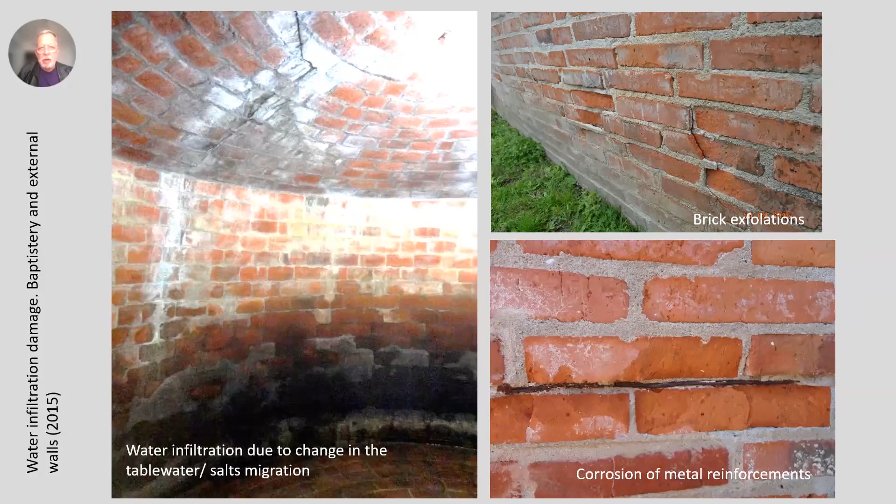Works continue with specific repair in the building and the study of an alternative solution for the baptistery and the bell tower. This is a structure affected by external conditions, rain, sun, and wind, and has problems with the steps since they were prefabricated. There are oxidation processes in the joint with the walls.

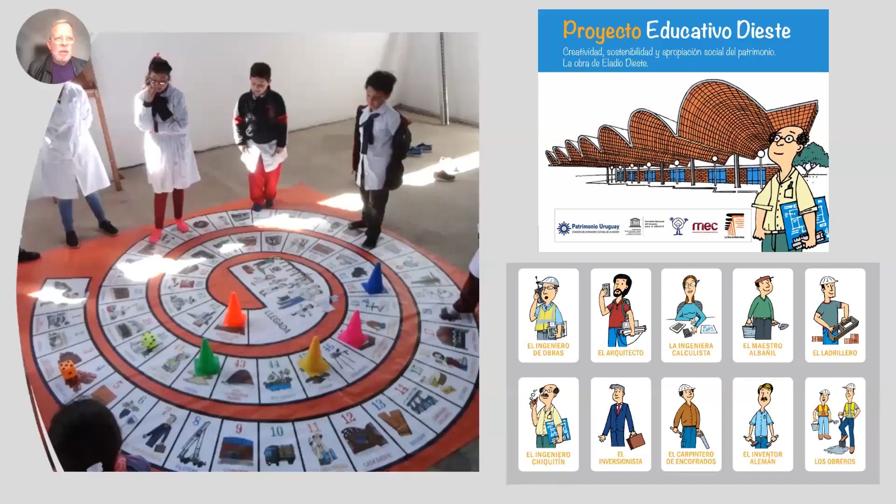Finally, I would like to insist that any conservation or restoration action doesn't make sense if there are no programs to reinforce the value of the building to the community that uses it. In this case of the estate, the work of an education program of game, reading, and interpretation methodology helps schools to generate a feeling of belonging with the buildings and their construction process, materials, equipment, and work of professionals. We emphasize brick as a local and industrial material, which is still used in the area, and its conservation.

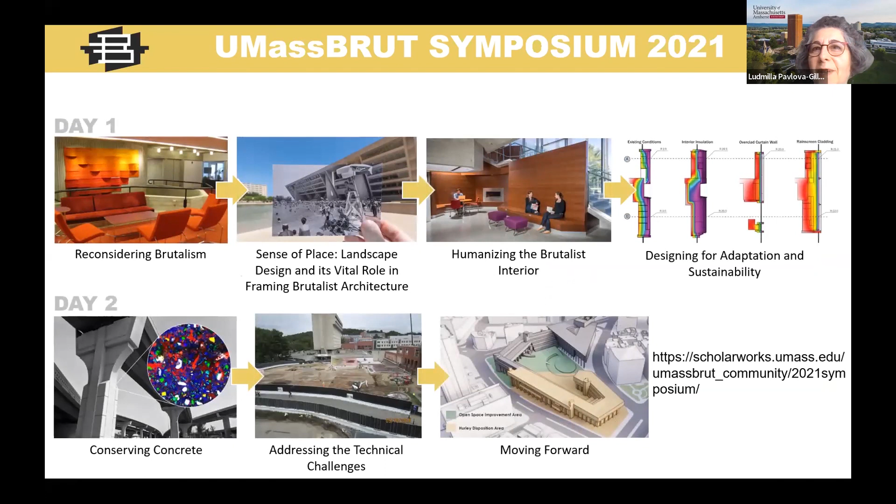And we continue to offer multiple tours and guides to engage with the public at conferences hosted on campus for annual homecoming and alumni events and on Docomomo tour days. We have successful exhibits and are developing new ones that will travel to other campuses as a way of building a statewide constituency of supporters.

And we continue to build a global network of allies who help us to stay relevant, share information about the modernist heritage, and also to be part of the social network of university administrators.

The 160,000 interior renovation and 25,000 addition to the Claire T. Carney Library by Design Lab Architects was completed in 2013 when the Paul Rudolph designed facility was 45 years old. It enclosed the existing building with a new gallery that extends the north-south campus corridor, connecting the library to the Science and Engineering building.

The project enclosed a multi-tiered exterior space and turned it into the social and academic center of the campus. It included concrete repair, accessibility improvements, colorful signage, and interior design that capitalized on a modern color palette for furniture, fabric, and tapestries. The design team also discreetly enclosed 25,000 square feet of formerly open-air space beneath the volume of the Rudolph Science and Engineering lecture halls.

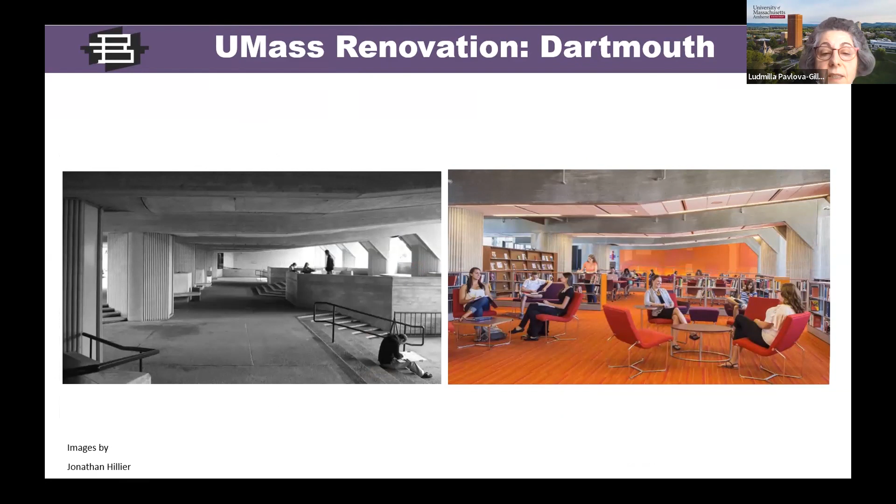The 2022 renovation of the Science and Engineering buildings by Ellenzweig focused on roofs, windows, heating, and ventilation, and was financed by a combination of state and university funds. The team engaged in a robust conversation with the Massachusetts Historical Commission and the community around the replacement of the historic windows and curtain wall for the SENG building that could be applied to the remaining campus buildings.

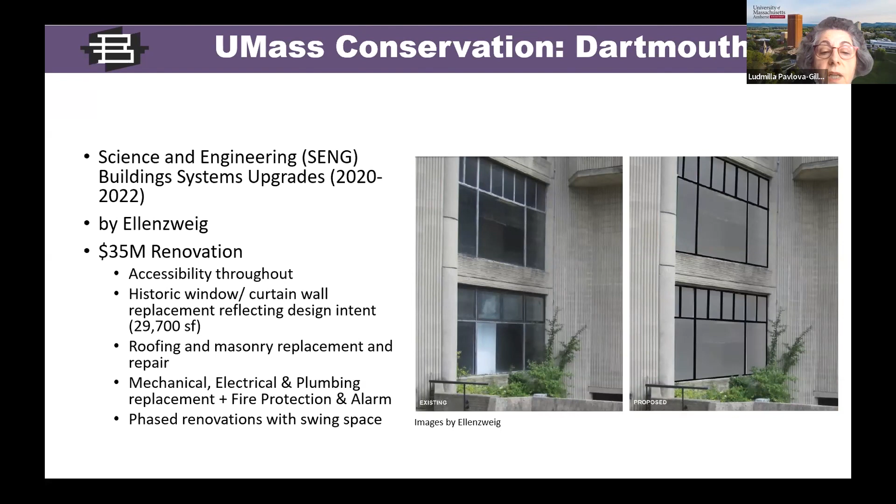The project relied on phased renovations with swing space for occupants. The process incorporated concrete conservation strategies for mortar and concrete matching that will also benefit future repairs.

The FAC is a large 220,000 gross square feet monolithic concrete structure housing multiple performance venues and facilities for visual arts, music, and theater on the north, and is unified on the south by a monumental colonnade and bridge.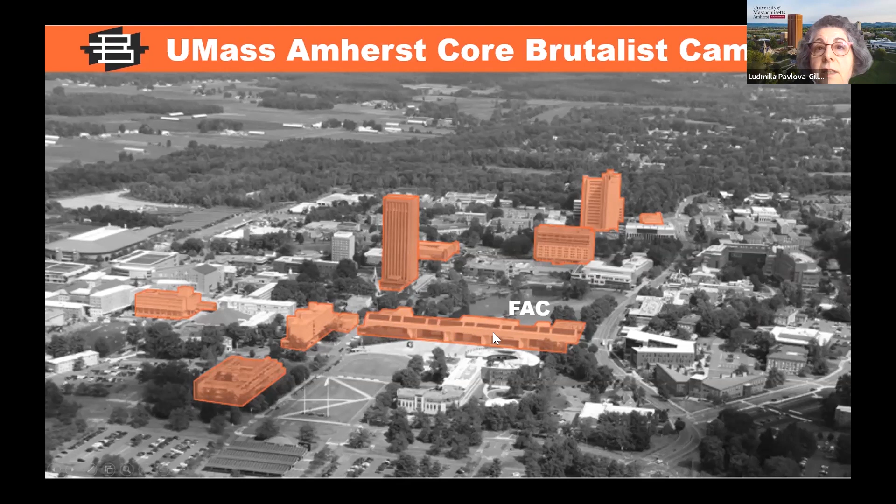The complex experienced multiple water infiltration issues, and past repairs to fix roof leakage at multiple locations have achieved varying degrees of success. There are also hazardous PCBs at control joints, which pose significant challenges for the repair of the exterior walls. The Arts Bridge renovation by Design Lab constituted a major reconfiguration of the interior spaces.

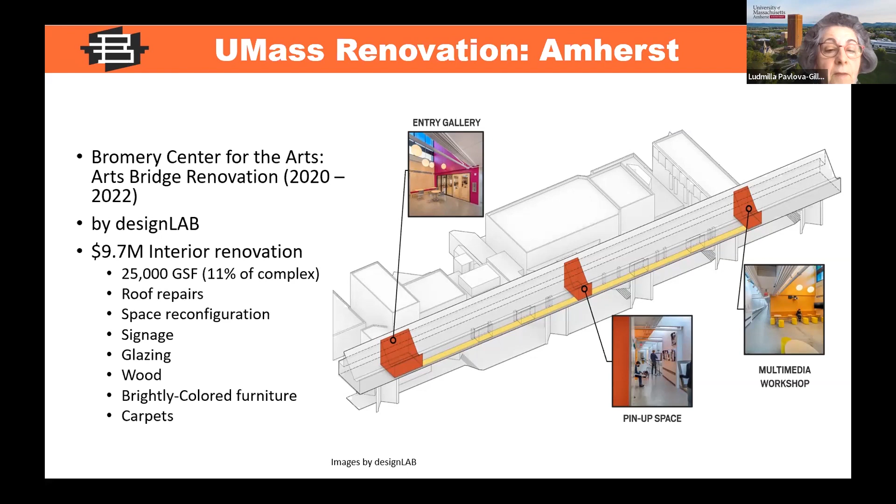This was enabled by the previous construction of a studio arts building, which relocated a large portion of the bridge occupants. This image illustrates the way the designers turned the challenge of the 600-foot-long corridor into an opportunity for community building by the placement of social areas for students engaged in theater, music, and art studies.

The decision to move the main corridor from the north side of the building was critical in the ability to adapt the classrooms in a way that permitted the addition of new HVAC systems.

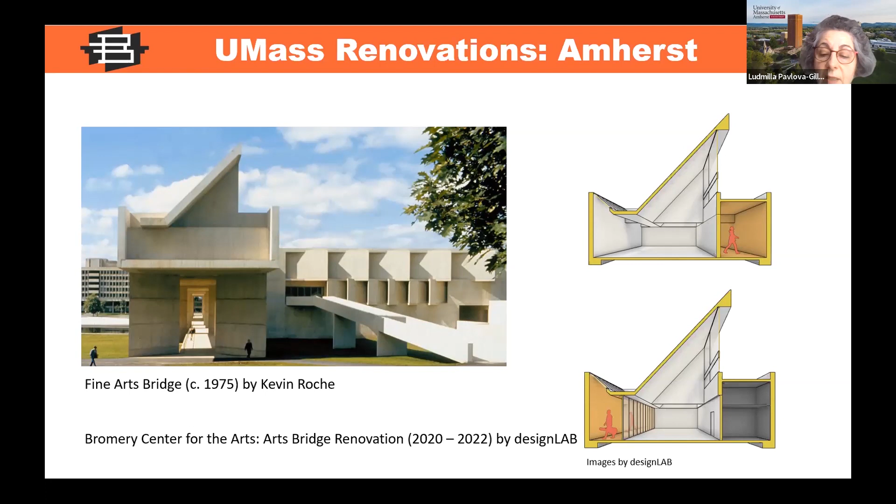The horizontal skylights and roof drainage you see on the left of the section underwent a major renovation that permitted the public corridor to be bathed in daylight. This also retained the initial design concept of the building by Kevin Roche as a sun machine.

The interior transformation you can see here from the existing image on the left to the new daylit and colorful intervention on the right was critical in improving the comfort of the faculty and students in the arts program. It also builds support for future renovations of our modernist buildings by making the complex more inviting to students and the public.

Each institution will struggle making decisions about how to manage program space needs in concert with capital investment in critical repairs, modernization, and growth. UMass Amherst is also currently engaged in a carbon zero campaign that aims to build new ground source thermal exchange districts, new carbon zero facilities, and to transition existing buildings from steam to low temperature hot water systems.

This provides an opportunity to advocate for careful system upgrades and modernization of our mid-century modern facilities. It also elevates the importance of building reuse as a part of climate action. The UMass Carbon Zero Living Lab is an opportunity to partner with the Association for Preservation Technology and support research on the technical and material qualities of the reinforced concrete in two of our most iconic buildings, to calculate the embodied carbon associated with their construction, and to study carbon neutral alternatives for their adaptation.

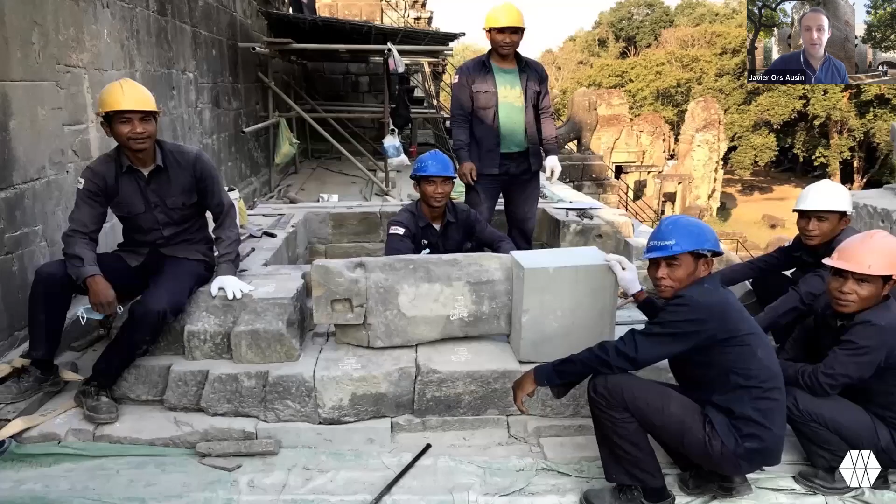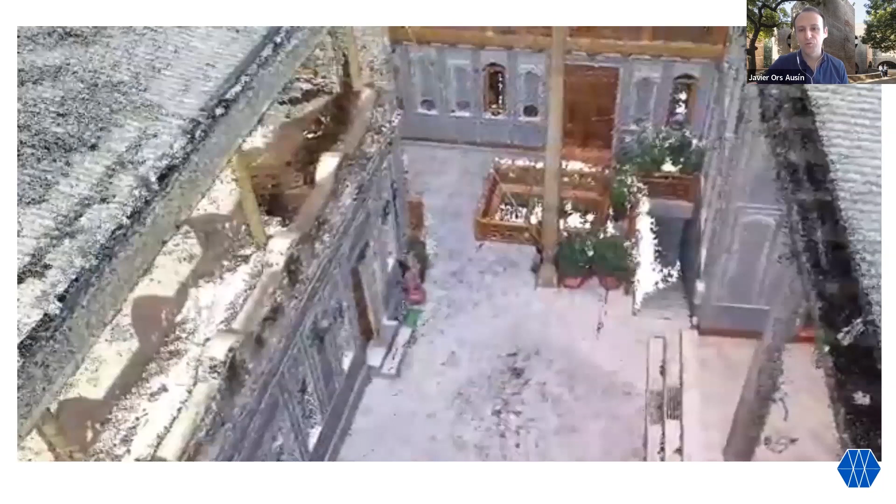Places like Cambodia, Angkor, where we've been working for many decades implementing conservation work at different temples. Also places like Uzbekistan, in Bukhara, where we are recently working on a project to map and document the traditional Bukharian houses in the historic center of Bukhara, bringing new technologies into the documentation process to assess the physical state of these houses and then develop conservation guidelines and strategies.

The question to me was, how is all this work relevant to IIM Ahmedabad, and what lessons can I share with everyone here that are relevant to this case and connected to our experience working at these places. Rather than going site by site, I thought it would be more beneficial to unpack some of our methodology, how we work, and the lenses we use to look at these places through, bringing in the different communities that are relevant and have a voice around these places.

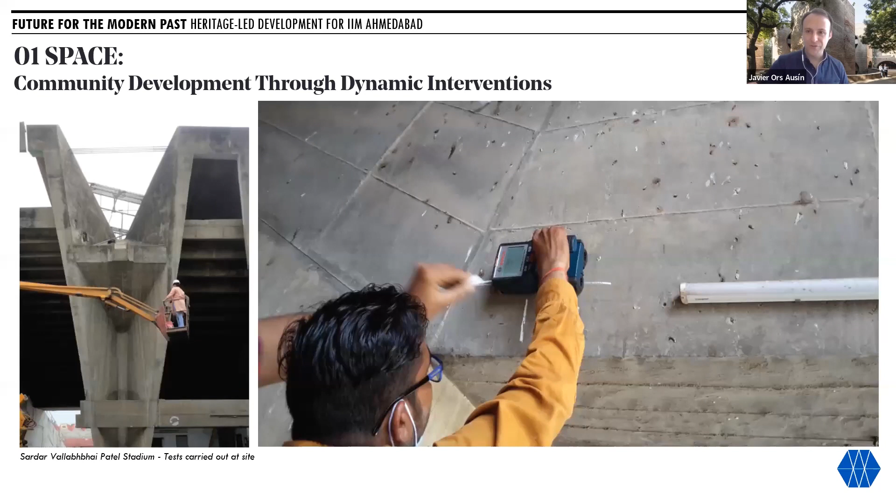So if we look through these three lenses at the different sites I mentioned before - for instance at the Patel Stadium, some of the very important actions we did at the beginning, in the initial phases of the project, was to assess the physical conditions of the building, to capture the physical changes the site went through, to create a foundation of knowledge about the physical space that allows us to propose changes and a new master plan that allows change, but in a thoughtful and respectful way to the architectural and cultural significance of the site. Because this isn't about stopping change at the site, it's about managing change in a respectful way.

This was exactly the same process we followed at Ontario Place, the mega structure I was showing you before in Toronto, where with our colleagues from the Architectural Conservancy of Ontario and the University of Toronto, we were able to capture all the changes that the three artificial islands in Ontario Place went through over the years, again to create a foundation of knowledge for future decisions.

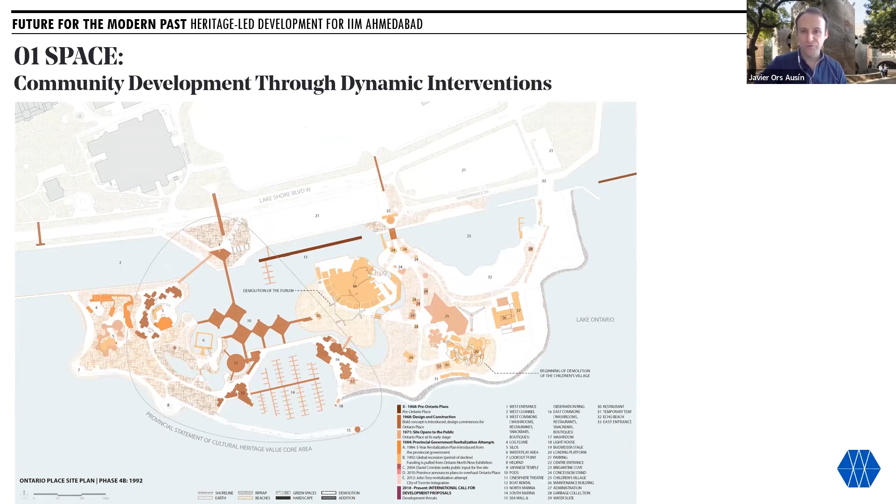And then if we look at these projects through the lens of the stories, this also gave us the opportunity - particularly now in Ontario Place - to record the stories of people connected to the site.

And that includes architectural historians, current and past managers of the site, people who go there to just enjoy the spaces, the public space, the architecture, and really make those stories publicly available.

I'm sorry to interrupt. Yes, I'll wrap up very quickly. I just want to show you a 30-second video that we produced as part of the process of really recording those stories and kind of using them also as an advocacy tool. We produced with our colleagues in Toronto a set of videos, so I just want to show you this 30-second video.

Hopefully now you can hear it. It is such a unique example of a particular form of avant-garde architecture, and there are only a handful of them in the world. And if you have one, why wouldn't you keep it? Not only is the thing conceptually ambitious, it's actually beautifully executed.

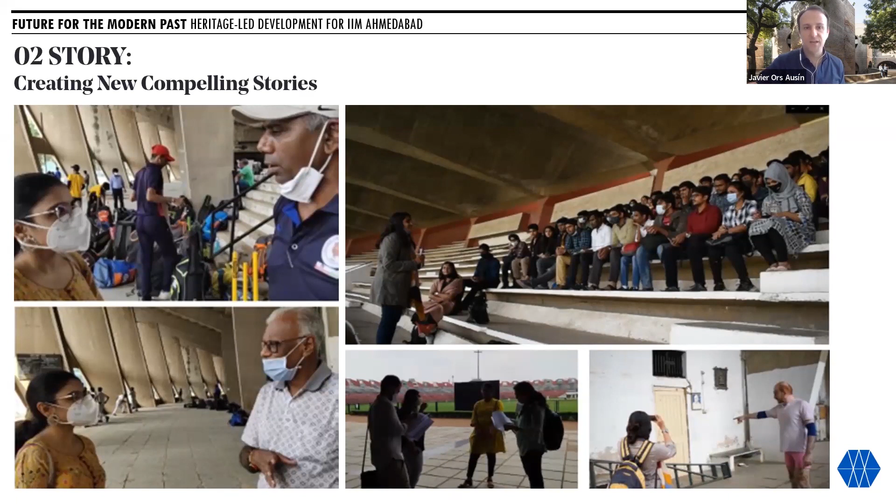And lastly, in terms of ownership, as I was saying before, this is the lens really to look at the sites through: the opportunity to create a collaborative leadership and bring together all the different key stakeholders who have a say in the process, including the local authorities, the heritage departments, professionals in the field, but also the actual owners and managers, to really sit them around the table and share ideas, aspirations, and challenges.

These are just some images of some of the workshops that we conduct in our projects to really discuss together, in a collaborative way, all the different challenges and opportunities that these places present, but again, to do it together and collaboratively. This is an image of our team in Ahmedabad, India, meeting with the Ahmedabad Municipal Corporation in the process of developing the conservation management plan for the Patel Stadium.

So my last slide: if I think about the key takeaways of how we work, and the lenses I was sharing with you about space, story, and ownership, I would say that the conservation planning process certainly involves the physical fabric of a place, but we shouldn't forget that equally important is the social fabric, and that engaging everyone who has something to say in the process can be challenging, but it's really worth it at the end.

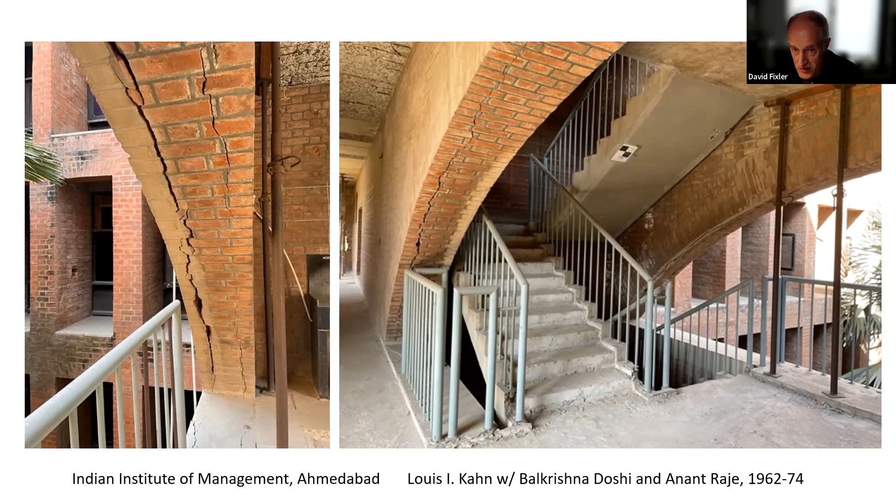Going back over towards the area between the library and the classroom building, if you look close, there's a lot of spalling brick. There are the same cracks under the arches here, continuing right down this pier. So it's all things that are ultimately fixable, but certainly very extensive and very ubiquitous.

I must say I was very impressed by some of the statements and presentations we saw yesterday and today, which again showed the importance of a holistic approach, as was mentioned just before, and to be aware of the particular importance of the role the brick played in building up this whole complex.

I allowed myself to share two more screenshots I took yesterday from the presentations, which I think are important for two reasons. First, for the cultural dimension explained yesterday by Amrit in his presentation, about how the brick was playing a role in the whole design process together with the National Institute of Design.

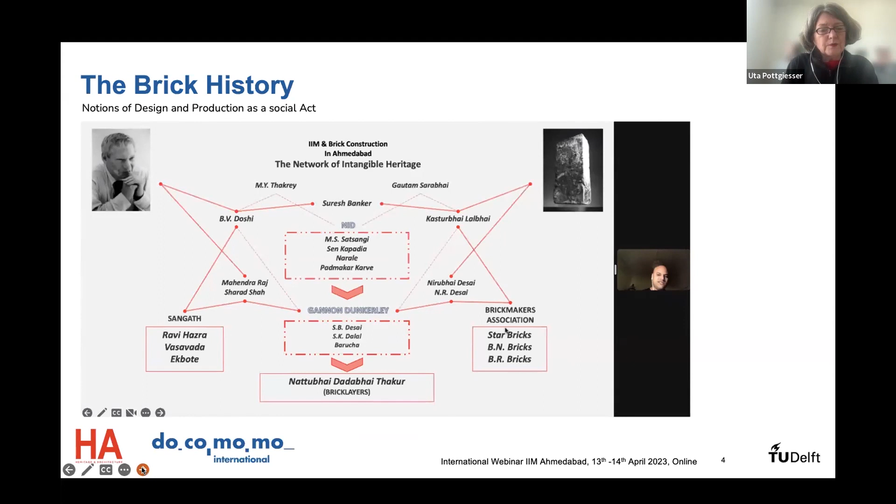So for its cultural dimension, but at the same time it's important to look at the brick as a technical dimension, because all these bricks, as shown in many slides, were produced on site with local material in a hands-on procedure. I'll come back to that when it comes to the technical implications.

I was also very impressed by the reports we heard from alumni who studied and lived in the buildings, confirming that historically, but even now, these places and spaces are functioning and well perceived, and that while changes might be needed for safety, comfort, and function, it is nothing impossible.

And yesterday Meenakshi made the point that probably the structural safety argument is maybe not the real argument.

Even though there are some critiques, there are points that, from a technical perspective, really show a way forward. There is deterioration, of course, and we can observe it. There's an explanation that it may be due to a missing protective layer, like plaster, but there might be other reasons, and that may lie in the brick itself.

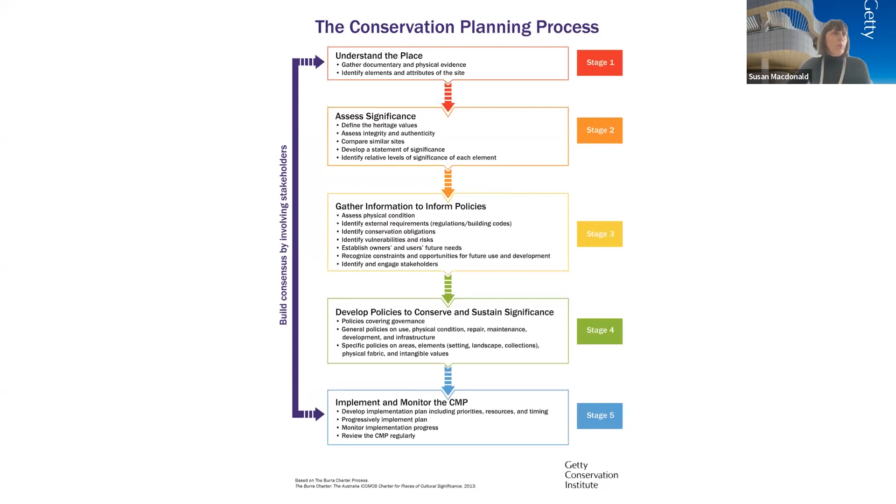Can I have the next slide, please? So I'm going to end by offering up some thoughts for what they're worth, and perhaps some people will think they're presumptuous, futile or naive, but I always remain an optimist until the very last. So firstly, undertake the much needed CMP to understand the significance of the campus and all of its attributes, the planning, the landscape, the building, tangible and intangible. Is it too late? Have we already lost too much? Or is there some way to honour what remains? Regardless, it could be a basis for interpretation.

Second, use the CMP as a basis for revisiting the flawed master plan for the campus as a whole. The campus will be better off for it. There are likely many more opportunities that would emerge as part of such an exercise. We need to be encouraging world-class planning for a deservedly world-class institution.

If it was considered worthwhile, I offer again today to work with IIM to bring together the world's best technical minds, including India's best, those esteemed colleagues who have already worked to understand the highly complex technical challenges. Can we determine what's possible? What are the implications of that in practical terms? What's not possible? We have conflicting technical reports and views. Imagine what could be achieved if there was an opportunity for discourse and collective problem solving. So I offer again to fund and work with IIM to fund such a group. It's an approach we use sometimes when the problems are very complex, usually to good effect.